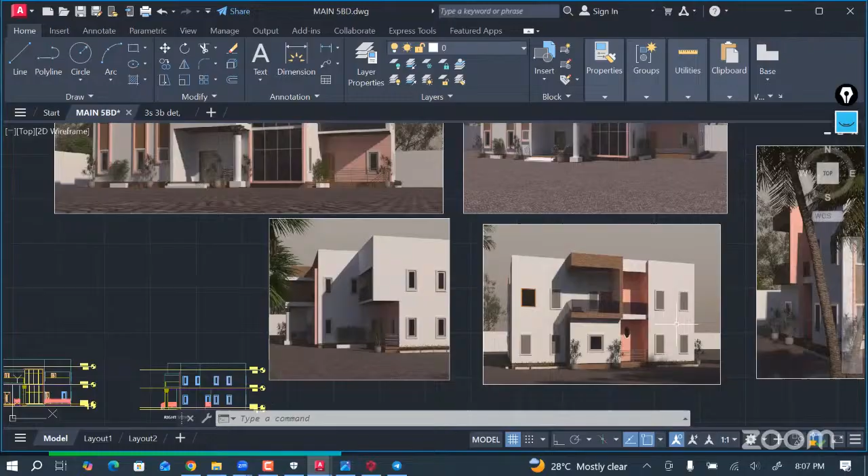So what you are looking at here is a 5-bedroom duplex. This is a design that was prepared specifically for this particular training. This is the 3D model of the building that you're going to be using for this illustration. You can see the 3D model over here, and this one as well.

Moving on, these are the plan views, and here we have the ground floor plan. These are the spaces and the levels of these rooms. This is another ground floor plan, but you can see this one just has these grid lines, and that is it. And here is our first floor plan - you can see the balcony and all the spaces in the room.

We are going to make this drawing file available for you, so that you can practice and repeat whatever we might have done. This is just an elevation drawing. This is the front view. We have a back view over here. We have a right view of this 5-bedroom duplex, and we have a left view. And then we have 2 section views, section X and section Y.

So whenever you get an architectural drawing, these are the kind of things you are going to be expecting to get. You get plan views, elevation views, section views, and plenty more views and details that are going to be required for this design.

So I don't have all the architectural drawing views and others. Like you can see, we don't have a side view here, and we also don't have a roof plan, and that is that. But that is not important for now, because what we have here is exactly what we are going to be needing for this illustration.

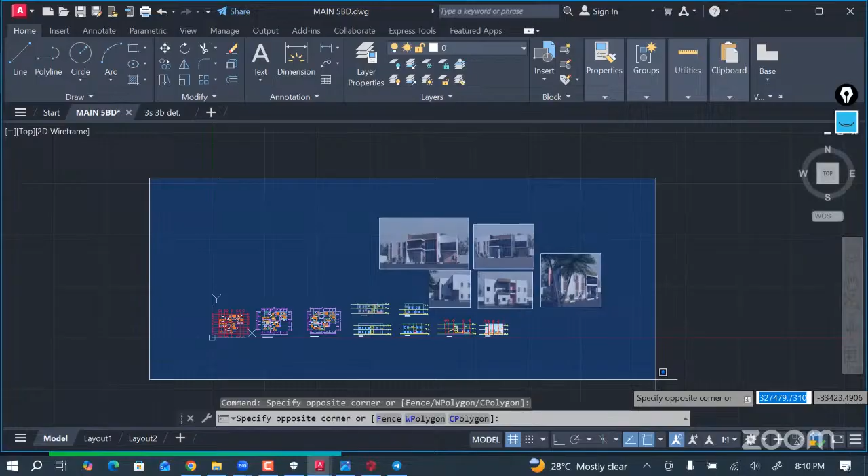So without wasting much of our time, I would like to begin immediately. The first thing I always like to do is copy or duplicate this file, so that when I start working on it, I won't be running into risk of making mistakes or altering the original plan. So just say CO to copy. I'm going to drag this and copy it up here. Let's just copy it here.

So this is what we have here. By the way, we are not going to be going all the way slow, trying to explain everything we do here in AutoCAD, because I assume that most of us are already familiar with the use of AutoCAD or the basic AutoCAD tools. So we are not going to be explaining much of how to use this software. I'm just going to be going directly and explaining what we are doing or what we need to do.

So whenever we have our drawings like this, I might want to hold on, let me shift this 3D view a bit. So let's just keep it somewhere here. Okay, so let's zoom into this. So this is a ground floor view, a ground floor plan, and this is also a ground floor plan.

So what I always advise people or students whenever they are about to begin a structural design is to first of all study the architectural design and try to understand what is really going on with that plan, the concept, what is inside the mind of the architect when he was drawing that, and what they are trying to bring out. Understanding the architectural drawing is going to go a very long way to ensuring that you produce a very wonderful design at last.

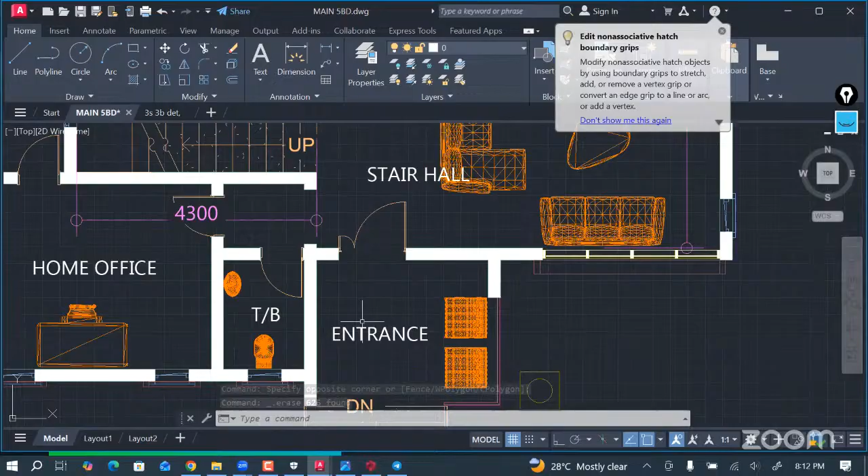So if you look at this now, you're going to notice this is the entrance. Let's study the plan. The entrance, and then you're going to see a very large open space entering the building. We have the living room area, and the stair hall is actually meant to be at this place. So we have a very large living room area, and then a passageway. Then we have this dining area and this kitchen area over here. And then by the left we have a kind of a home office and then a visitor's toilet and bath. So the dimensions are all attached as well. Then a veranda opens to an exit there.

So we have this patio, we have 2 bedrooms at the ground floor. We have a laundry as well. Then at the first floor, following the staircase up, we are going to find a study room closer to the edge of the building, and then a balcony, family living room, pantry, balcony, bedroom, 3 additional bedrooms. One of them is a master bedroom, and then a balcony and all that.

So we now understand this. We can say from what you've understood, this is an open space - the dining is open, the kitchen is open to the living room and all that. So whatever we are doing, we must make sure that we don't create elements or columns that are going to cause obstruction to the passageways.

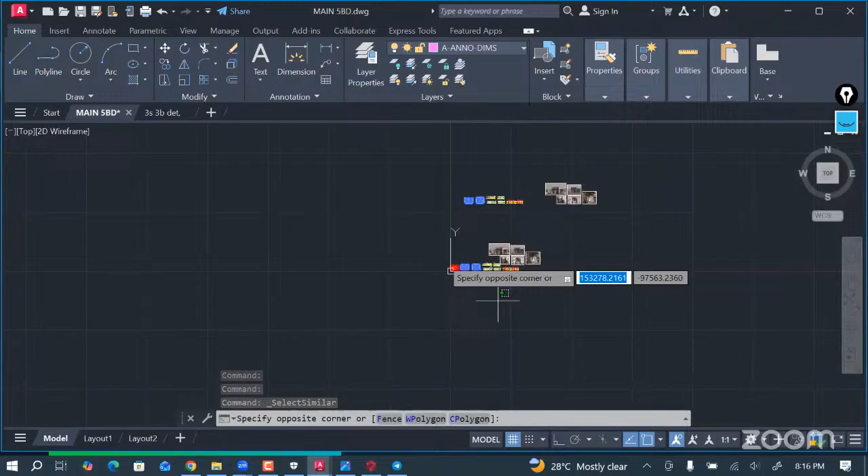We can see this plan now already has dimensions attached to it. I am not going to be using these dimensions, so I'll just delete them. Select them, or let's go select similar so you can select all of them, and let's hold shift so you can select this one and leave only this one, then delete. So our dimensions are gone.

I also want to delete these hatches over here. For that, just select one of those hatches, select similar, then hold down on our shift key and deselect these, and go delete. Once we have done that, this is what we're going to get. This architectural design wasn't done with AutoCAD - if you notice that, this was actually done using a 3D software like Revit and all that.

Moving on now, we can begin adding our axis and then our columns. The first thing you are going to do is add axis at random positions anywhere that we feel is going to be more suitable. Later you will still have the option to edit that - that's why this is an arrangement. You are still going to rearrange all of them and position our axis at the positions where they will be most suitable.

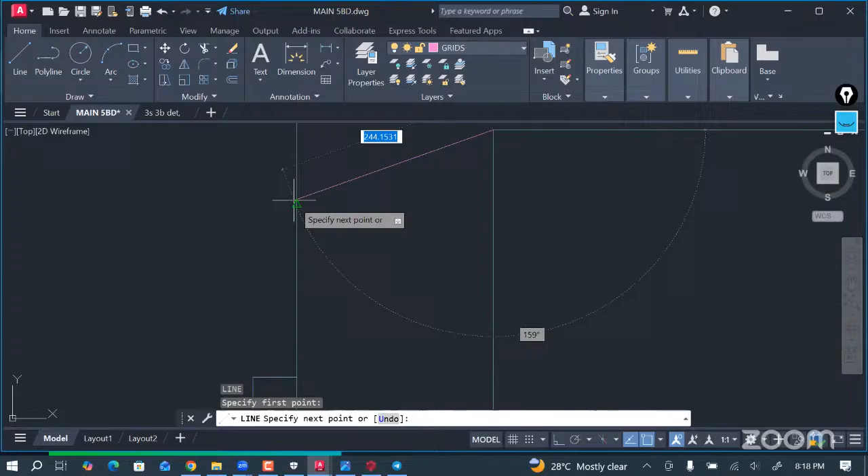Opening this up, I want to make our grid layers active, because that is what we are going to be using for our axis. I'll just draw a line. I want to place this axis as the center line of this wall over here. For that, I just select this and draw a line from this point to this point. Hold on a minute - okay, so nearest. Let's draw this line.

So let's delete this and draw it again. Okay, so we have the line here.

So now we can start adding our axis. To add your axis, simply click on use construction line, say XL, enter, and then V, enter for our vertical axis. Then locate the midpoint of this line, and that is going to be the center line. Once you've done that, delete this line, making sure you delete every unwanted line so you don't run into errors while modeling.

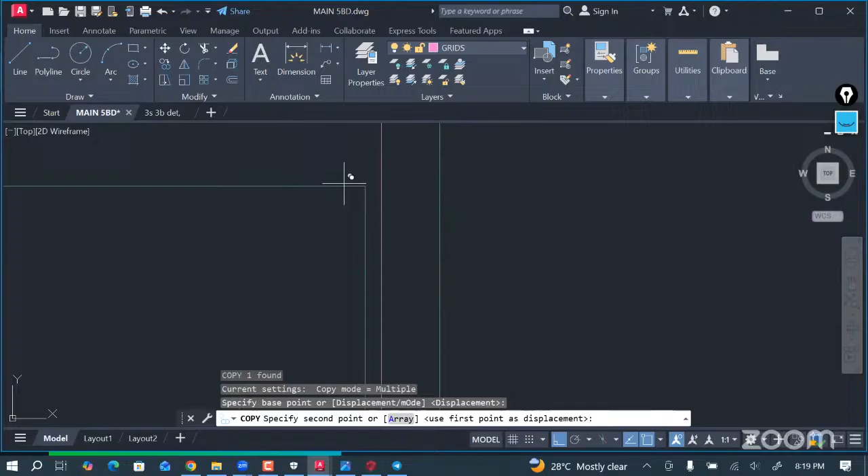So we can now copy this line and start placing it at points where we feel is going to be suitable. Later we'll still get the option to edit this. What I just used is a simple vertical construction line for now, so we can start creating our vertical axis at any suitable positions, and later we'll still be changing that.

Okay, so we've had one here, so let's add one here, and we can add one here too. Let's locate our walls. I think we're done with the vertical lines, but maybe let's add one here as well. Okay, that is fine.

Now we can start adding our horizontal axis. First, let's draw a line just like this all the way down, then XL for construction line, enter, then say H for horizontal construction line. Once we've placed one, escape, then delete this one immediately.

Now let's select this, CO to copy, and start placing at wall center lines. You can place one here, one here, and let's place one here. So where else do we need one?

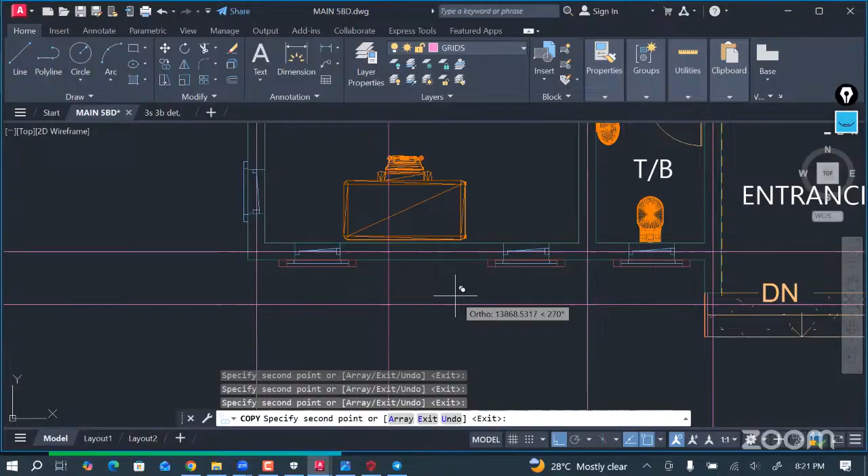Okay, so we've done that. Let's place an additional one here, and let's also place another one here. We've now succeeded in placing at all the necessary points, so we can place one here, and we can take one of these vertical construction lines and place one here too. That is fine, that is fine. We've now succeeded in placing our construction lines at the regions where we feel they are going to be most needed.

So the next thing we can do is trim off all these excess construction lines that are running to infinity. For that, I'll just use a simple rectangle tool, select this, draw a rectangle just like this, and go over here.

Okay, seems like we have a column here, as you can see in our 3D view. Let's check this 3D view. So we have a column here, and this column is under this balcony - it's the column that's actually carrying the balcony above.

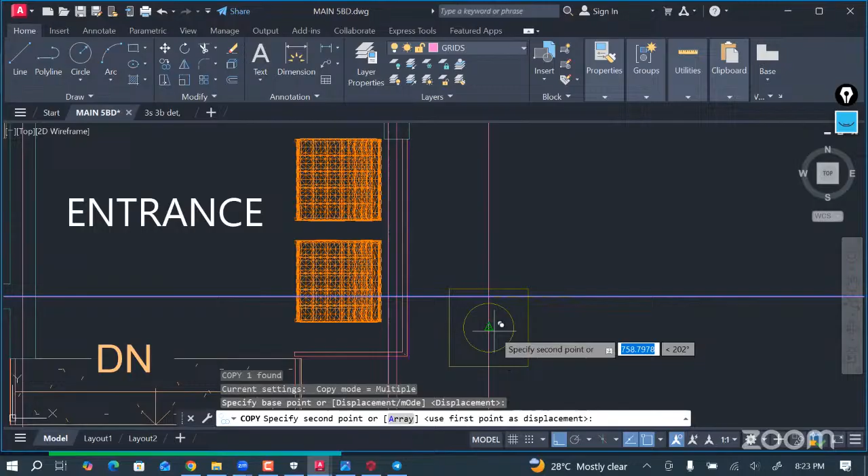So for that, we also need a construction line for that as well. So XLB, enter, and let's place at the midpoint of this circle, and then let's get this one as well, adding the midpoint of the circle. Okay, so we've done this now.

So let's trim off the excess construction lines. Select this, go TR, enter, and then select this, trim this off, trim this off, trim this off. Oh, I think we made an error there. Let's trim this off, trim this off. Okay, press escape, and then we can simply delete this.

Once we've done that, we're going to get something that looks like this, which is working out fine for the time being. So we can continue - I think we need a horizontal construction line at the edge of this wall here. Let's just take this one and move it over there. Okay, we've successfully done that now.

So moving on, we're now going to start adding our columns at different strategic positions. To do that, we're first going to begin with a basic column size, starting with an initial sizing of the column.

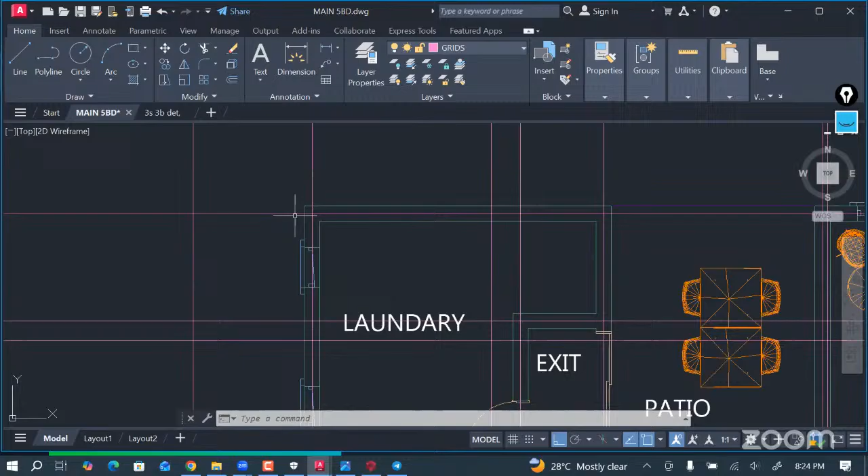Knowing that this is a duplex, a one-story building, the size of our columns that we're going to start with is going to be around 225 by 225 millimeters, knowing that the width of this wall is only about 225 millimeters.

So let's go to annotate and try to set our dimensions, so that we can see it very clearly. Let's go to modify, and let's go 300 millimeters. Let's set the text to 300.

Let's go to primary units and change the precision to 0, then say okay, set current, and close.

The width of this wall is 225 millimeters, as you can see here. So we can start by using a column of 225 by 225 millimeters.

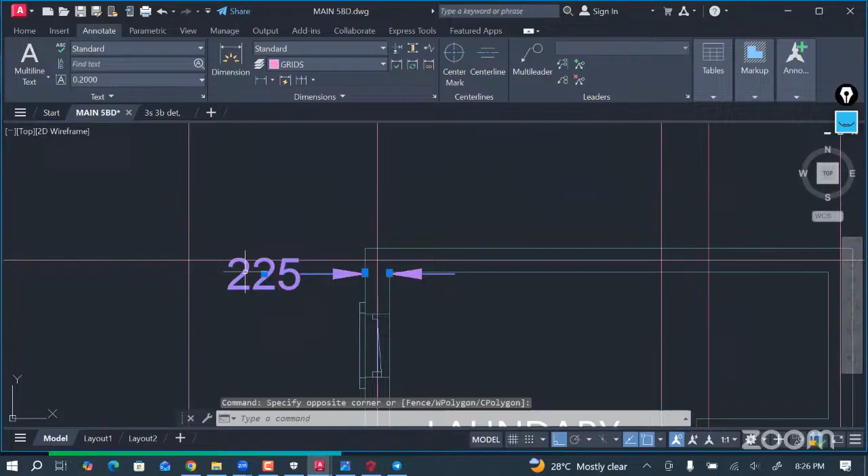For that, now we are going to go to Home and change our layer properties to that of columns, and then let's say LW so that we can make our line width display active. Let's set this up, this should be by layer. Okay, now click REC, enter.

We're going to create a rectangle. We are not going to be using lines to form this rectangle, because ProtaStructure only recognizes polyline elements for our columns.

So now we are going to say D, enter the dimensions 225, 225, enter 225, enter, then click at the other point. The reason why we are starting with this is because that is the smallest we can have.

The initial sizing of your column actually depends on the kind of structure that you are designing for, the massiveness of the structure. If we are designing for a 4-story building, 5-story building, or if you are designing for an 8-story building, your normal engineering mind should tell you that a 225 by 225 millimeter column is not going to be suitable to carry that building.

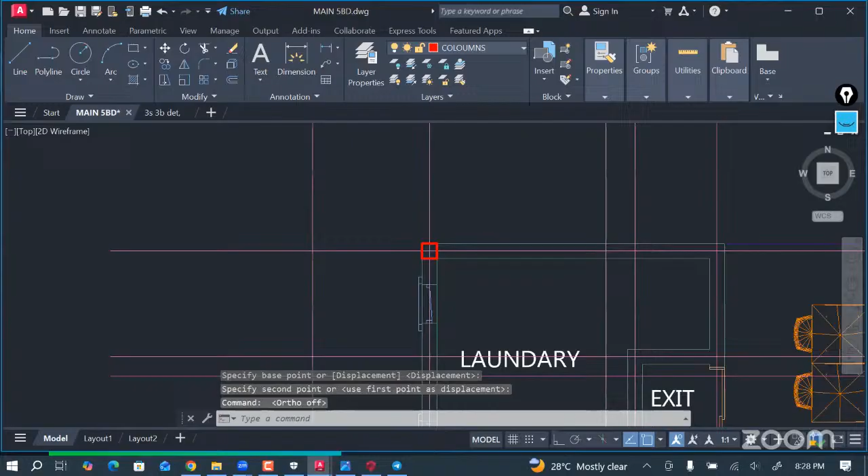So I'll just move this. I'm going to get the geometric center and then move it to this point. Yeah, so this is what we have now. I've now successfully created this first column.

We can now simply copy this and start placing it at strategic points where we feel columns are going to be necessary. This is an arrangement drawing, which means we still get the option to start editing and rearranging them and placing them where necessary. This is just to get the initial setting of how it's going to look like.

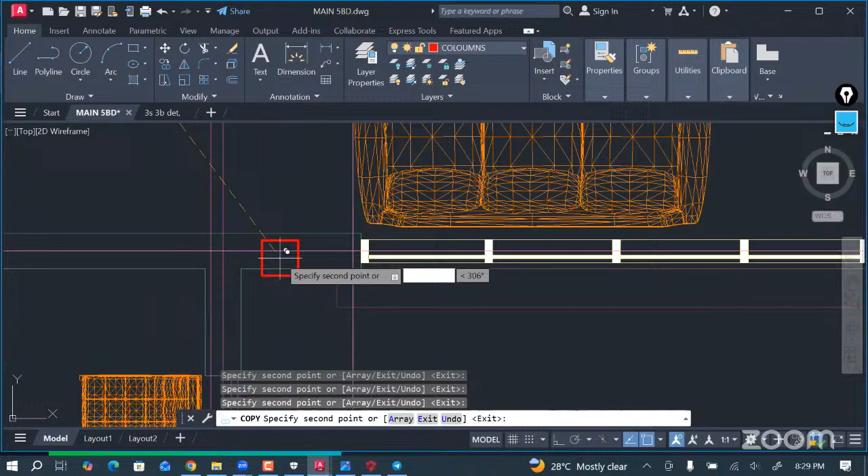So we can simply click and place columns at any point we want. We can have one here, and one here, let's add one here, let's add one here, and let's add one here. I'm going to try to be faster. Let's add one here, and let's add one here. We can add one here as well, and let's add one here, let's add one here. Okay, so that is good.

So we can add one here, can also add another one here, and we can add one here, and then we can also add one here. So this is fine. We can add one here, and I think this is good for now. Let's add one more here. We are still going to be editing all this when the time comes. We can also add one here, and let's leave it like this for now.

But then again we still need to add this circular column. This rectangular line is just representing the base of the column, of this circular column. So for that, now we are going to use the circle tool. Just click C for circle, get the center point, and then click at this. So this is going to be the column for this as well.

Having done that, the next thing we are going to do is start shifting our columns and making sure that our column distances between them are very, very accurate.

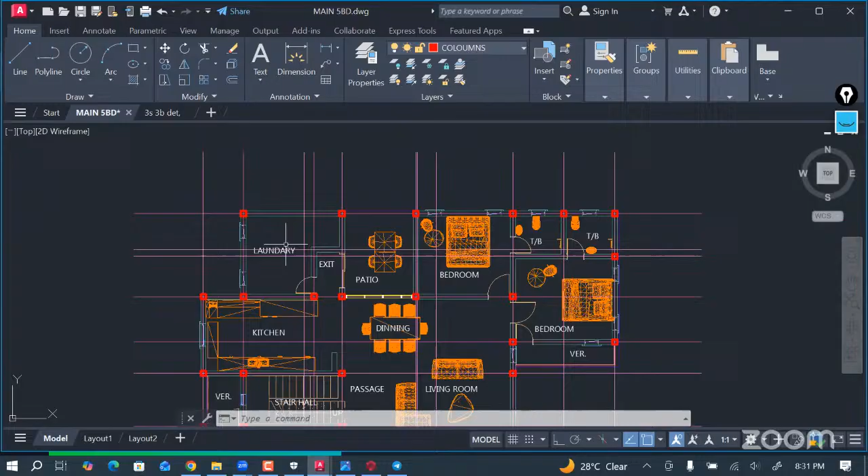Okay, so we need to maintain a maximum distance between columns of 6 meters. Knowing that this is actually a small structure, so we need to maintain this. If I'm designing for an 8-story building, because it depends on the kind of structure, I will need to maintain a minimum distance between columns of about 6 meters, knowing that that kind of building is going to be sitting on a foundation like a pile foundation.

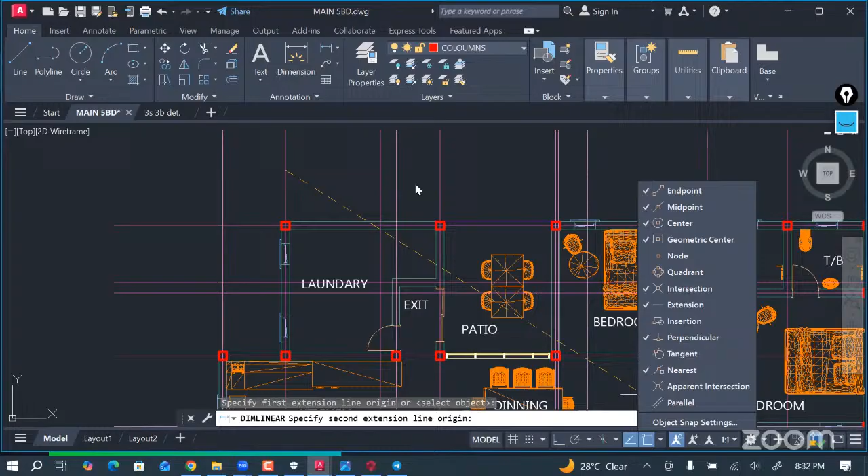So for that now we are going to take a measurement of this distance here. Let's take from this axis to this axis. So the distance between these columns... okay, that's not the distance. So let's go from here.

Let's change these properties for our grids, for our dimensions rather. So let us choose any one of these. I can use the dot dimensions for our grids. So let's go from here to here now, and the distance between that is 4,300 millimeters. So it's actually less than 5 meters, which is very good.

So we can continue to this place now. The distance between these columns is 3,225 millimeters, which is nice.

So we can just simply delete it. We can continue adding our dimensions. So let's go from here to here now, and we have 2,225 millimeters, and here we have the same thing.

So the lesser the number of columns that we are getting, the more economical our building is going to be. So for that now, I just need to check the entire span or the total distance of these two spans, knowing that these spans of 2,225 millimeters are actually very small. So the distance is 4,450 millimeters.

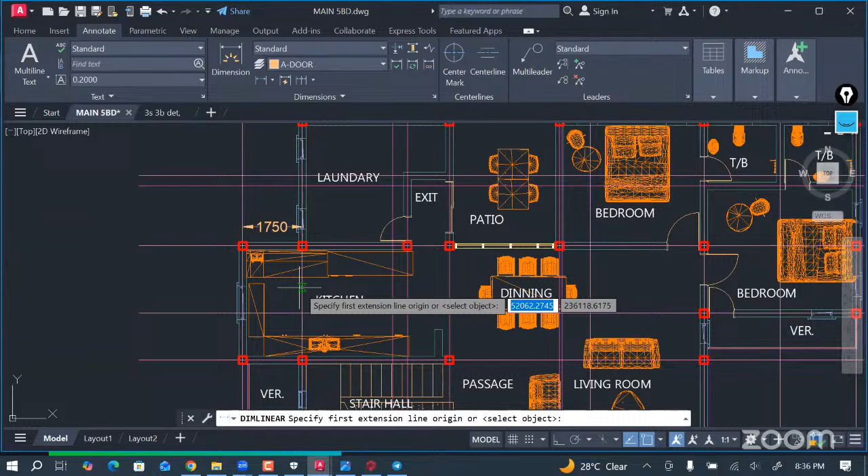So moving on now, we have added these columns and we have also added this one. So we can check the distance between these two columns here. This is 1,750 millimeters, and the distance from this one to this one here is 3,075. So let me check the distance from this column to the one at the extreme.

Okay, so for that now I will need to delete this column down. Let's delete this column. So the distance between this column and this one is going to be 4,300, and the other one is going to be 1,750. That's very fine, so we can leave this just like so.

Okay, so we are also going to leave this. This looks very suitable, so we can leave this one here now. Let's start going from this side and check the distance between these columns. From this one to this one, 4,300, and let's add one here.

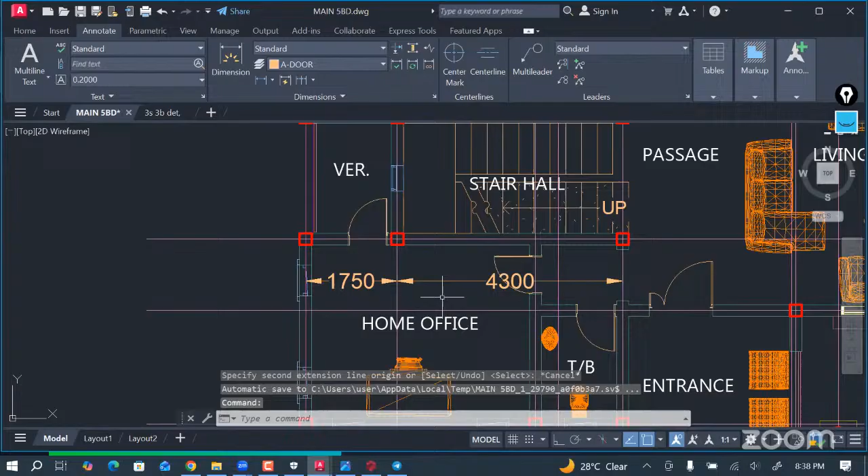Let's do that again. So the distance here is 1,750 by 4,300. Okay, so this is actually very accurate. It's the same with the one above here. Okay, so that's very fine.

We have just finished placing our columns. So this column can be here and this one can be here. We just need to leave this column at this axis intersection, and that is that for now.

So the next thing now, you need to do some adjustments here. As you can see now, these two columns are not well spaced apart, the distance between them is just 1,400 millimeters. So let's check the distance from this column to this column, be sure that it didn't exceed 6 meters, and it's only about 3.425 meters. So for that now, I just need to delete this column.

And then let's get rid of these dimension lines. Okay, so this is what we have now. So then this area around this panel, we are going to leave this as so just for now. So when we go into our beam paneling, we can now be able to adjust it, how we are going to leave this living room, or what you are going to do about this. Okay, so that is that now.

So for that now, after placing your columns and your axis, the next thing that you need to do is what we call superimposing. Superimposing is just making sure that the columns that you have placed at the ground floor level are not intersecting spaces at the floor above it. So we are just going to perform what is called superimposing.

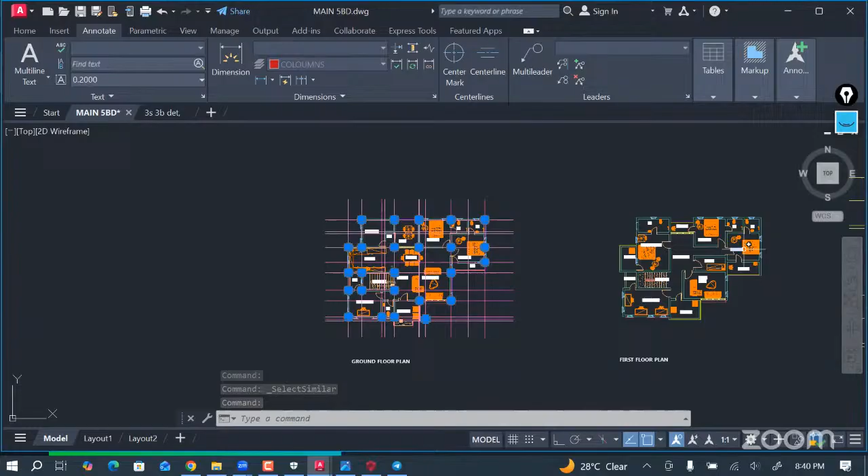We are going to copy this column and then place it at this first floor. When we place it now, we can be able to see where the column is leading, so we are going to choose a base point.

Let's go CO, enter, for copy. Then let's choose the base point. The most stable base point that you can choose is the staircase area, because the staircase area doesn't usually change. But if you choose this base point at this edge, if you go to the first floor, there is every tendency that it's not going to be the same because it's not typical. So I usually prefer to choose a base point from the staircase area, because the staircase area does not change. So let's copy this and then place it at this position right here.

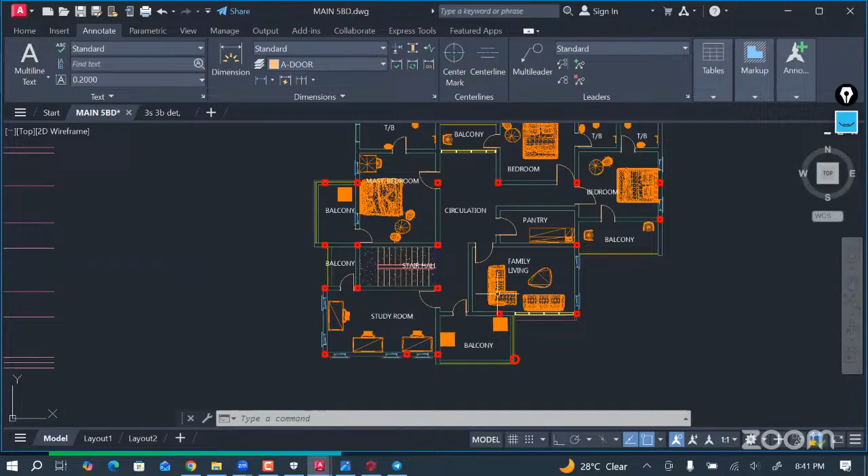Okay, go escape, and then this is what we have. So let us just simply watch this design and look at the places and their placement, and be sure and know which of them is intersecting with any space. Luckily we don't have anyone intersecting with any spaces or any element, except for this one. This is actually intersecting through this door.

Okay, so this is going to be causing forcing this door to either shift to the left or right, and this door is actually leading directly to the master bedroom. Looking at this design now, you're going to notice something. This door was actually pre-designed to be at this particular position because a space is meant to be here around this place. So we cannot shift this door up, or we cannot shift it down. So for that now we need to know what we are going to do about it.

Okay, so we are going to treat it right now. So if we shift this column, let's go CO. If we shift this column from here and bring it somewhere around this place, let's take this base point. Okay, so let's delete this. Okay, so where is this now going to be positioned in this ground floor?

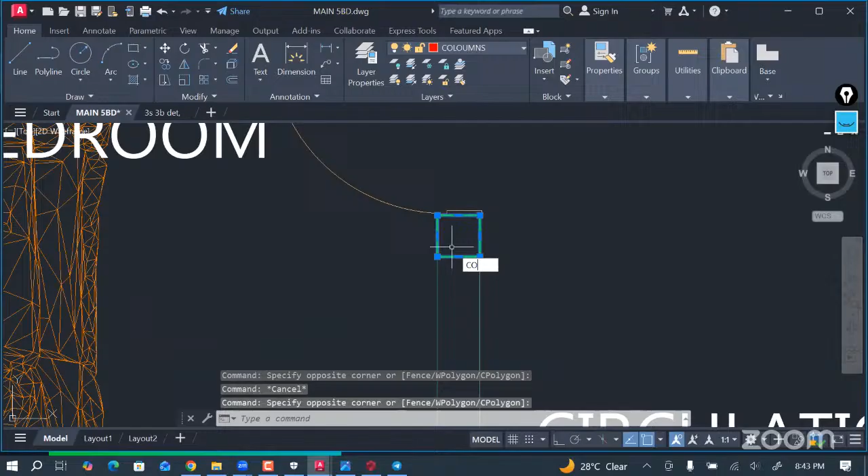Okay, that is what we are all about. Okay, so let's select this. Let's change the color of this particular column. Let's go properties, and then let's change the color, and let me use this green color, lemon color. Okay, so let's select it, go CO, and then let's go from our base point to superimpose it on our ground floor.

Okay, so let's see where it is now. Okay, so this column now is intersecting our kitchen and the space between the kitchen and the dining area, which is not very suitable. Okay, so this position where this red one is the most suitable position for this column at the ground floor.

So for that now, what we can do is to push this column upwards. Okay, so if this column starts from the ground floor, we can just terminate this column. Okay, so that is the best thing we can do. We can terminate this column at the ground floor, after the ground floor, and then start up another column at a different location, maybe around this location right here.

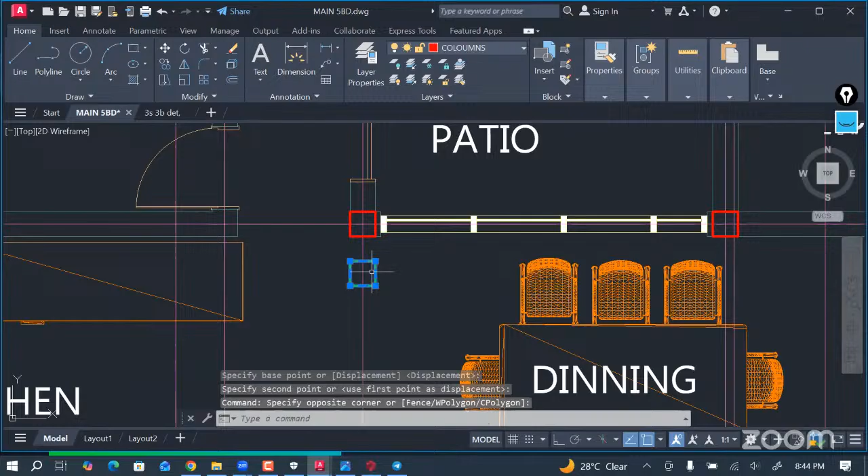Okay, so for that now, let me move this column, enter. Let's move this column from this place now to this place. Okay, so now we can simply delete this column. Okay, so since we are terminating this column at the ground floor, this column is going to start from foundation and go through the ground floor, and then we terminate this column here, and then this column now is going to start or begin from that first floor and then go all the way to the roof.

Okay, so for that now we need to indicate that, so that we don't make a modeling mistake when we now start in Protastructure. Okay, so just simply select this column, and then let's change the color of this column. So I can use this color. Okay, let me use magenta, this magenta color. Okay, so whenever we see this plan now, we can be able to say that this column is terminating. Okay, so any column that we label with this color, we can know that this column is actually terminating at this position.

Okay, for this now we can simply change the color of this column, indicating that this column is starting from the first floor to the roof. Okay, so you can leave it as green, or let me change it to cyan, this cyan color. Okay, so this is nice for now. This is very good. Okay, so for this now we can now continue checking our columns and their positions.

Okay, so knowing that these columns are now going to the roof, and the roof is not as heavy as the first floor, the columns at the ground floor, your column beams and slabs at this position are going to be carrying your columns and beams at the ground floor, will be carrying your beams, will be carrying your slab at the first floor level. So the columns here will be carrying this first floor level, and the columns at this first floor level will be carrying your roof loads. Okay, so that is understood. So the columns here will be carrying this first floor, and the columns here will be carrying the roof.

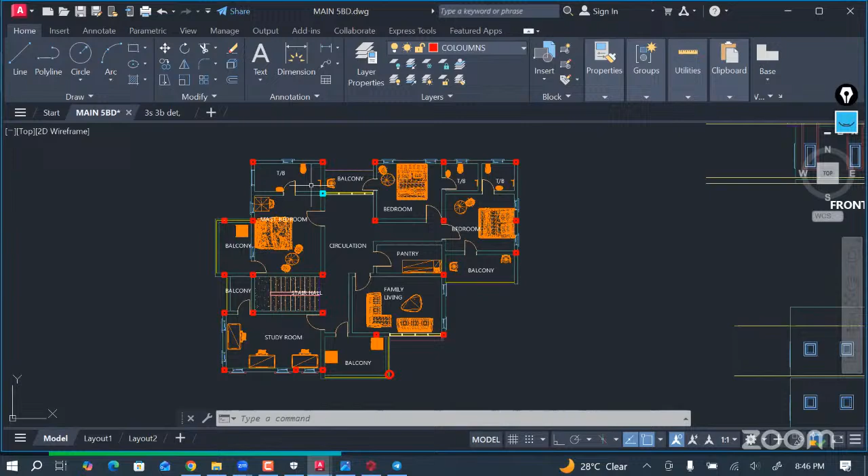So knowing that these columns are going to be carrying the roof, and the roof is not as heavy as the floors, what we can do is to terminate one or two columns. Okay, so we can reduce the number of columns that are coming up here. So that way the structure is going to be more economical.

Okay, so for that now we will simply need to terminate this one here. Before we do that, let us check the distance between these columns. Let's go from the center point of this to the center point of this. Okay, so this is about 6.05 meters.

6,050 millimeters. Since this is carrying the roof, I might want to go all the way, and it's only about 6 meters. So we can simply remove this column at the first floor level, which means we are terminating this column after this ground floor.

Let's select this down, then go to properties, and change this to this magenta color. I think our grid lines are interfering with this magenta color.

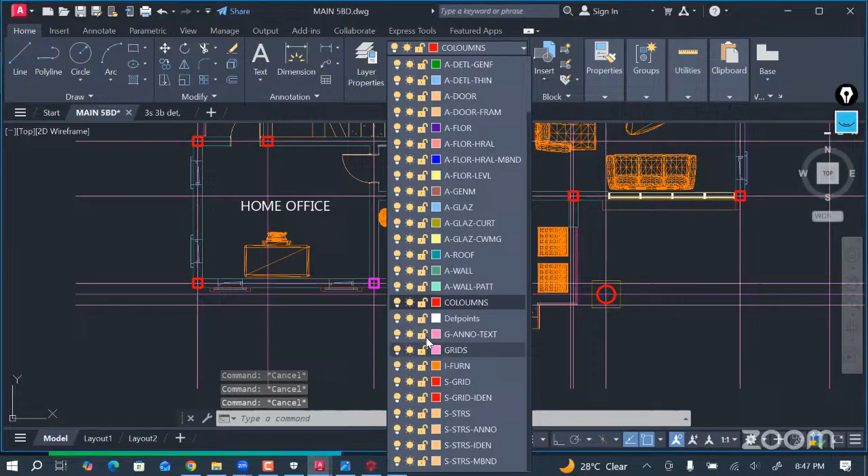So let's change the color for our grids, let's go something lighter. Let's find the yellow color. Okay, yeah, I think this is more comfortable to look at, just like so.

So you can see now that we have two columns that we are going to be terminating here. We have this column here, and then we have this column here. We are going to be terminating both of them.

Okay, having done this, next we need to start adding our beams, performing what we call paneling on our design, our plan. So we are going to be arranging our beams in our plans.

For that now I will need to delete most of these furniture elements over here, because they are not going to be very useful. So to do that now, we first lock our columns and grids, so that we don't mistakenly delete or select them. Let's delete all these label elements, text labels, let's delete this.

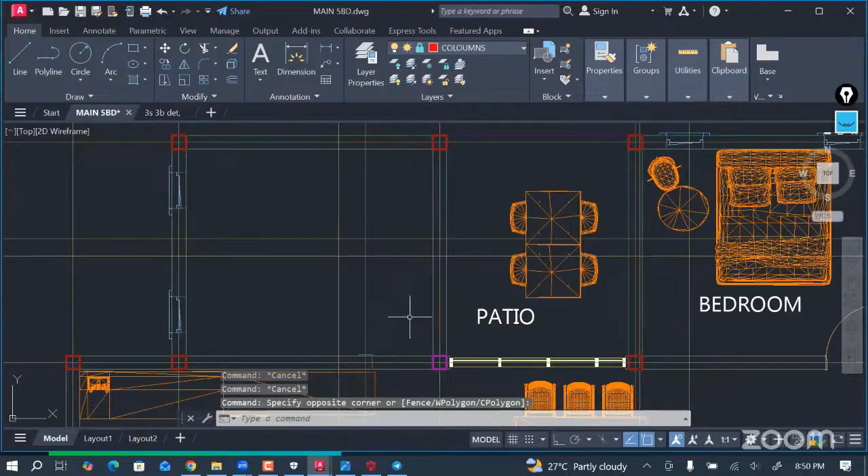So there are some basic rules that you must keep in mind while performing your paneling. Number one, your panel area must not exceed 30,000,000 millimeters squared, that is length times width of your panel. It must not exceed 30 meters squared, that is 30,000,000 millimeters squared.

So for that now we need to check the size of this panel area. This is 4,300 millimeters, and let us also check the distance from here to here, so this is 3,725. Let us open our calculator too, and go 4,300 millimeters multiplied by 3,725. Okay, it is 16 meters squared, which is less than 30 meters squared.

So this simply means that this panel is okay to be just like this. Assuming this was higher than 30 meters squared, what I can simply do is run a beam at the middle, just create a beam, draw it here, add another beam from the top to this place here. But since this is less than 30 meters squared, this is suitable.

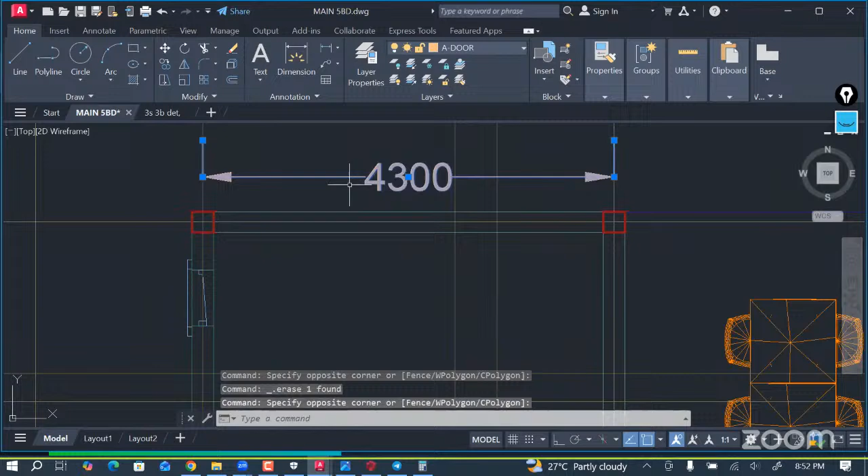So for that now let us delete this as well, and then let's go to our annotate tab, and label this as our first panel. Let's select a multi-line text, and go P1, capital letter P1, which simply means panel 1. Let's select this and change the size of it, so I can go 450.

Say okay, so I can change the color of the text, I can use any color, let me use this one for now. So this is our panel 1, this is panel 1. So let's select this now, enter to move it, and then let's move it to the middle. So this is our first panel over here.

Okay, so this is an empty space right here, but above it now there is a balcony, over here, so this balcony is also going to be modeled. Let's go CO to copy rather, let's copy from our base points and then place here, let's see where it is at.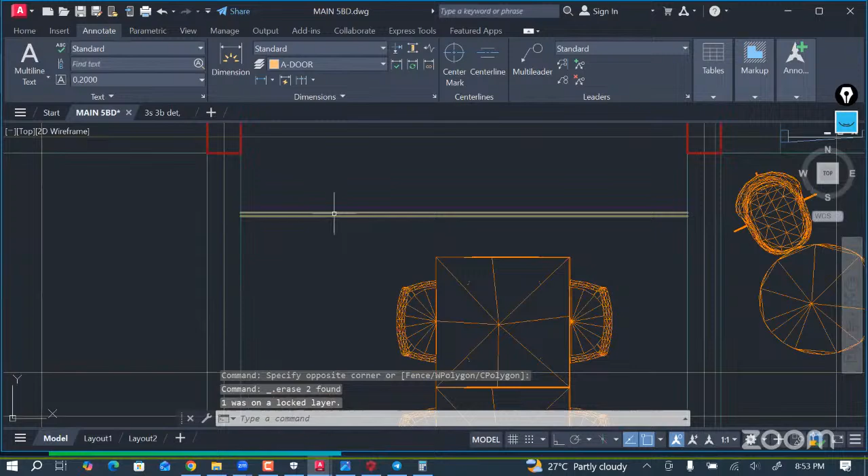Okay, so this is where the slab edge stopped. Here are the railings, and here is where we have the slab edge. Now I am going to delete these furniture elements, delete this, and delete this text symbol.

Let's select this CO and move this one over here and call this panel 2. Always feel free to type something on the chat box if you're not understanding anything - I can save your questions. We are going to have some minutes for questions.

So this region here, this panel from here now to this place is going to be our second panel too. For that I will just need to select this and then MA to match properties, and change the slab edge line so that it can look like this. So this is panel 2.

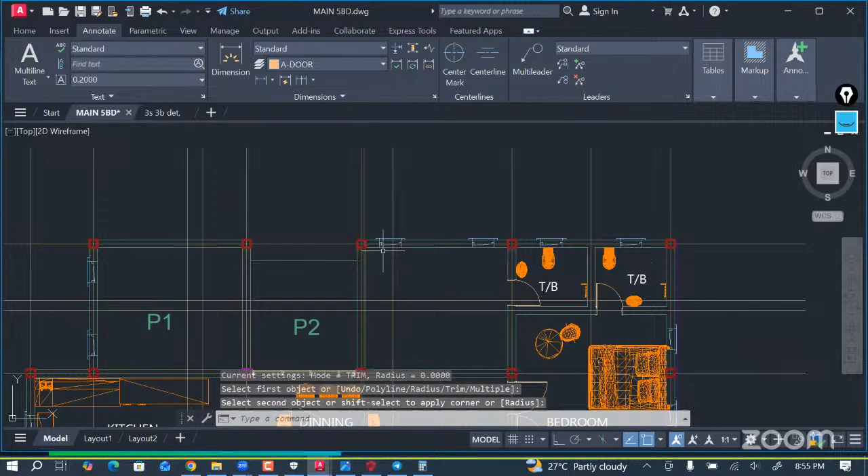For the following panel you can delete this, and let us also delete the doors, and check this just like this. So this is going to be our panel 3. Let's extend this.

Let's copy this immediately. So this is panel 3. Now we are going to delete these ones as well.

The bath, the wash basins, and the shower, the doors, and the toilet seats. So we can extend this over here.

So for this now, let's copy this and place it here. So this is going to be one panel and this is going to be one panel. Let's change this to P4, which is panel 4. Let's change this to panel 5. So this beam is going to be going from this column to this column now.

This beam will go from this column to this column. So this beam now, we have to go from this panel, which is going to be bounded by a beam that will be resting on this particular beam. So this beam here is going to go from this beam to this beam, and then this beam is going to be dividing them, going from this beam to this beam. Okay, so that is that.

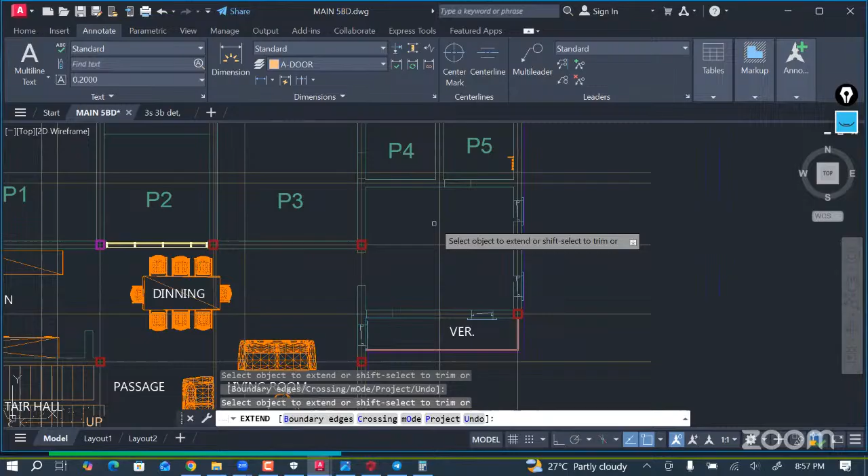Let's extend this as well. Let's extend this. Let's copy one of these. So this one is panel 5, so this one should be panel 6.

So you can see how we are going on with this gradually. Coming here now, we can choose to collapse this wall. This is not a structural wall, it's not a load bearing wall, so you can simply collapse it.

Let's go from this place. Let's delete all the furniture elements on this kitchen, and let us extend on this one.

So this is going to be our 7th panel. Let's go CO. So this is the 7th panel now.

So always bear in mind how you do your paneling. I believe we are all following, and please, if you have any question, please save your question - we are going to have time for that. So how you do your paneling solely depends on you as a structural designer. Whatever you do solely depends on you. You can choose to panel it in a different way.

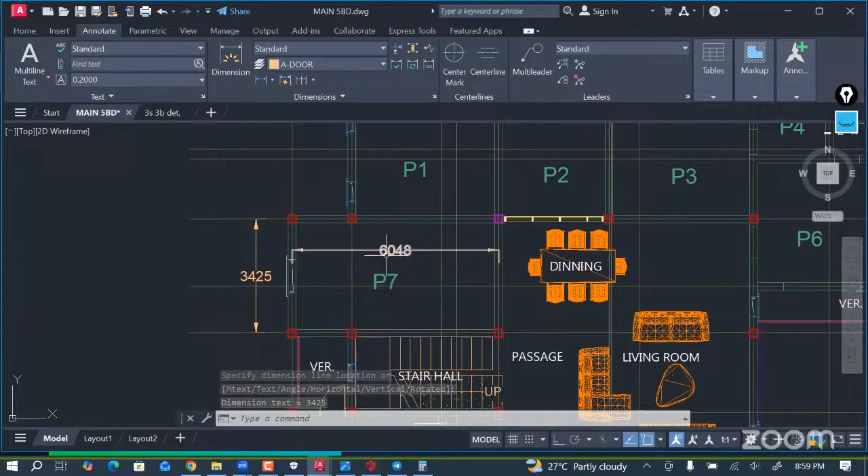Okay, so if it is more than 30 meters squared, we now have to change. This is 6,000, about 6,000 millimeters by 3,000 millimeters. I think this is good for now. So let us delete this.

And then for the dining area now, we are going to notice something very disturbing, that this panel is becoming already too large, and our beams are going to be going up too long. So there is a thumb rule you need to keep in mind whenever you are doing your general arrangements: none of the beams should be longer than 6 meters. This beam, none of them is longer than 6 meters for now. So that should be the maximum length of beams used in this kind of structure.

This is already measuring 7,004 by 7,200 millimeters, and that is way too much. If you do the math, it's going to give around 49 meters squared. Well, this is 7 and this is 7, so it is already more than 30 meters squared.

So what you can simply do is run a beam across this place to break up the panel. But if we do that, the length of our beam is going to exceed 6 meters, because this is already 7 point something meters. So if we run a beam here, it's going to be too long, and it's going to fail due to deflection.

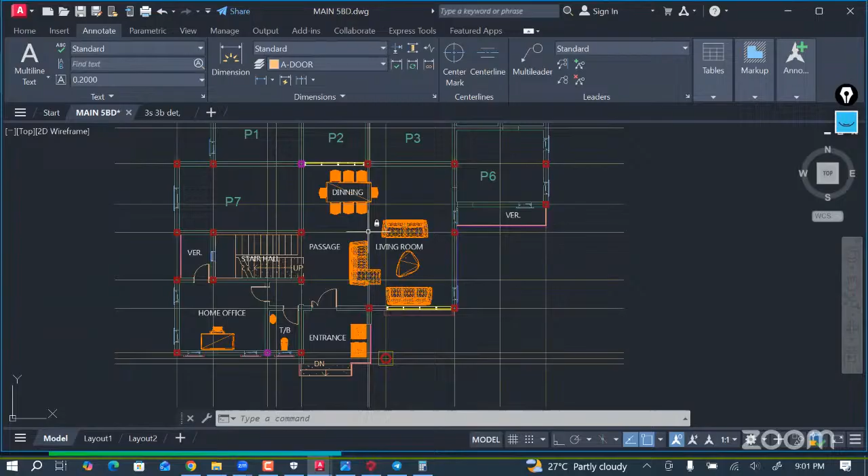So what we can do is add a column at a point to be able to break up the beam and also break the slab at the same time. To do that, we are just going to select one of the columns.

So let's turn one of them on. Let's select this column, copy it from here, then position it. Where should we position it? We can choose to put this here. This is very nice - we will still have some space left between this column and the other, about 800 millimeters, which is actually fine for someone to pass through. So this is not actually that bad to have this column around this place.

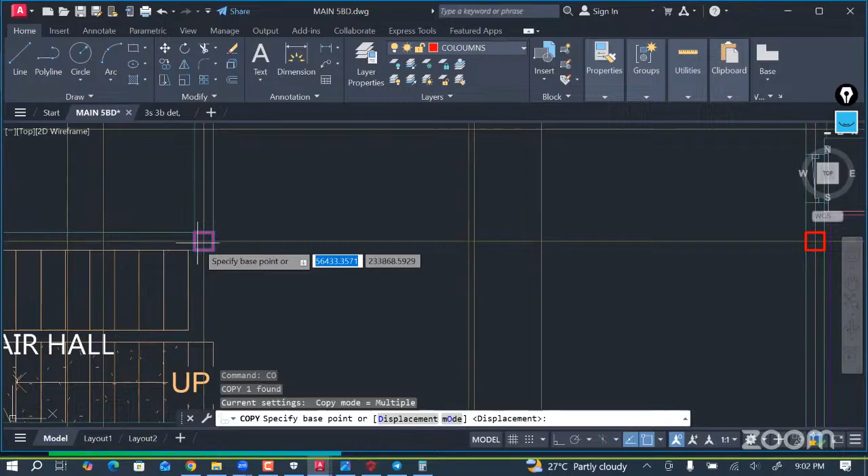Having done that, you can now start paneling that. So let us delete all these furniture elements here. Okay, I think we mistakenly deleted our column. Let's go CO, let's lock this... okay, so we have locked our column back to how it was.

So let us now simply extend these beams here. Let's select this, go EX, extend. Okay, we have now extended this. Let's extend this as well, EX, extend. So let's extend this one all the way down. Okay, so this is what we have.

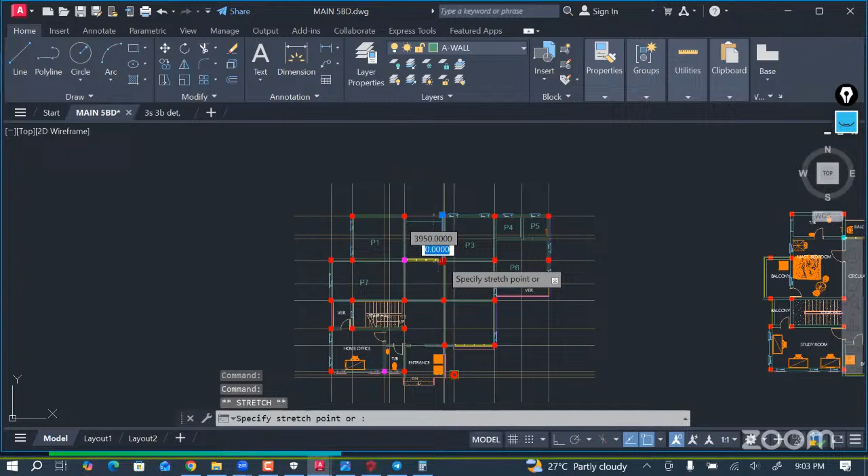It looks like this is not straight, so let's go Ctrl Z, let's undo that. Okay, so let's extend that manually. Let's continue extending, let's extend this all the way down.

So for this column now, we can see we have two axes here that are very, very close to each other. So I would like to move this here. Let's go CO, or M. Okay, let's turn this on. Let us move this from here to this place now. So let us also turn our grids on.

So I want to delete this grid and we can finally get rid of this. This is actually not a structural wall - it didn't go all the way, it actually stopped at the balcony region. You can see from our 3D view that wall didn't go all the way up. Then let's see whether you can see it from here - okay, we can see it very clearly, because it's in white color. So this wall here actually stopped somewhere around under this balcony. So we are going to leave this just like so.

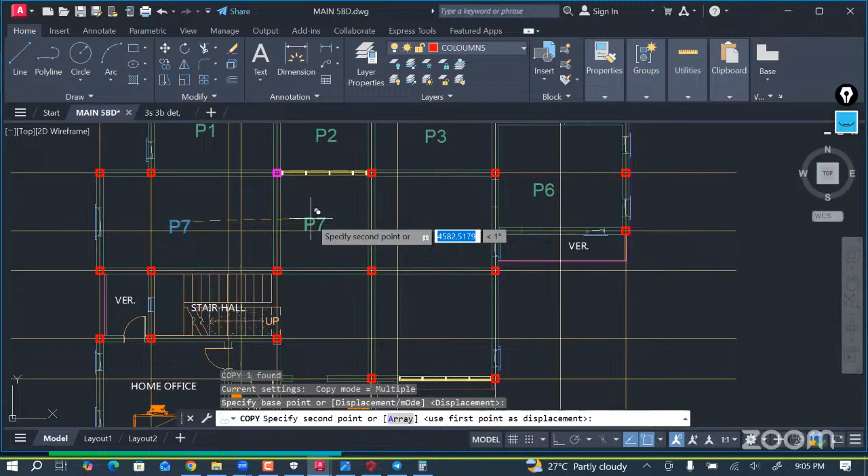So let us now label this. CO, enter. Keep one here, one here, one here, and then one here. Let's change this - this is panel 7 and this one will be panel 8. This will be panel 9. Let's move this to the middle. Panel 9, and this will be 10.

This will be 11. At this region here, we have a veranda at the ground floor level, so we can see from this veranda what we are looking at here. And then we have a balcony above around this region here, so we are going to get the dimensions of that balcony from this place.

You can see now this balcony is actually lengthier than the other one below it. So for that now I just need to copy this, go CO, enter, and take the reference from this column, and then let's place here. So with this now we can simply delete this, since this is not going to be useful.

So this is going to function as our slab edge line, this line here. Let's just select this and delete this, and then we can have only this as our slab edge line. We are going to model it as a slab edge line. We are not going to be adding a beam around this place, because looking at what we have in our architectural drawing, there's nothing like a beam around this place.

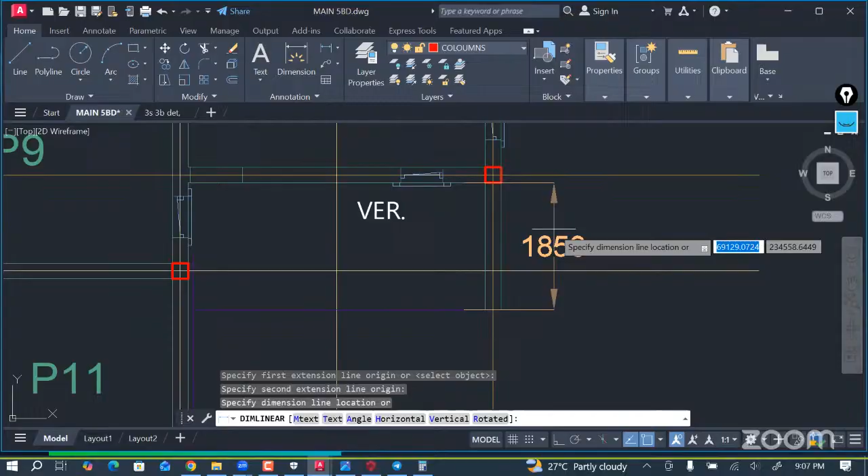So then we have a wall that started from this place, and that is exactly what you are going to be doing. Although this is going to be a very lengthy cantilever, about 1,850 millimeters length of a cantilever beam, that is going to be of a cantilever slab. It's actually very possible to be modeled and designed.

So for this now I'm just going to take this CO, enter, and then this is going to be our 12th panel. Let's go P12. So let's delete this panel 12, and then for this stair hall, let's delete this label.

So this, we are going to be creating a void around this staircase region. That is going to be telling us that this is actually a void. Let's draw a line just like so, a diagonal line, and then let's draw another one from this place now to this place. So we can take the property of this and let us match properties with this one.

So this is very good, so this is going to be the void. We can actually label that if you want, so let me just use this to label it. Let's go void, so we don't forget, and let us copy this, or move rather. So this is going to be our void space.

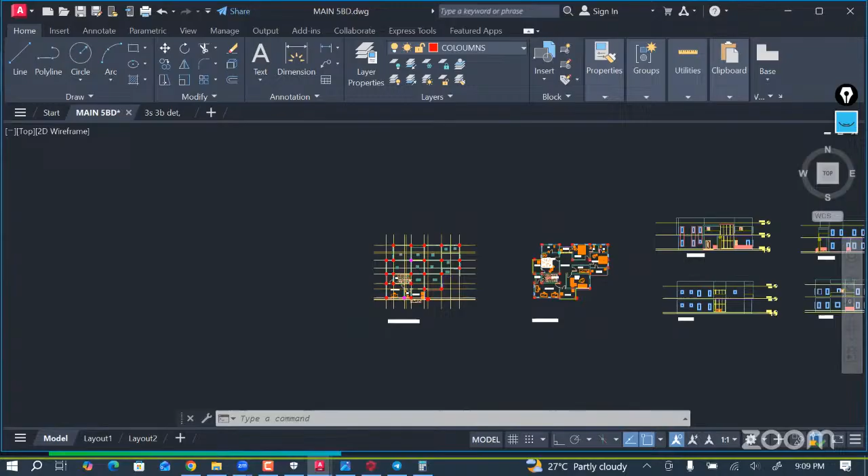Additionally we have a kind of a cantilever slab around this place. Looking at this design now, you're going to notice that this slab, this balcony actually extended past this slab, this column points. So for that now we are just going to simply copy this so that we can be able to note the exact points. So let's copy from this place now to this place, and that is going to be the edge, the slab edge.

So for that now let's go F for fillet. Let's fillet this one. So this is exactly how this is going to be looking. So we're going to be having a cantilever here. This is going to be another panel, and the last panel we did was 12.

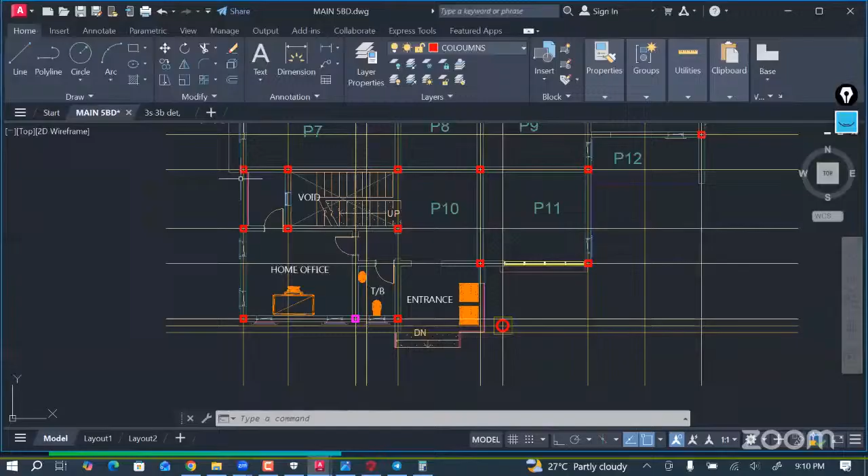So let's go CO, and then let's copy this. This is going to be panel 13. Let's just leave it outside there. So this is actually very good. So a beam is going to cross here, and then a cantilever slab is going to project out to this place now. So this is very good for now, and then let's continue doing our paneling.

So there is a balcony here upstairs. This balcony is actually, okay, so let's check. Let's go and check. So this balcony now, let's select this, go CO. Let me copy from this column as a base point. Let's paste here. So this is very good. You can delete this one here, then we can match properties with this one.

Okay, it appears it's not matching, but you can still use that as a base point. So for this now, let us select this CO, and then let's paste this here. So this is going to be panel 14.

So for this home office, we can delete this home office area. So let us delete the visitors toilet and bedroom, and let us delete this one as well, and let us delete the chair around this region as well. So let's go CO, enter, and then let's keep this one here. So this is going to be our 15th panel.

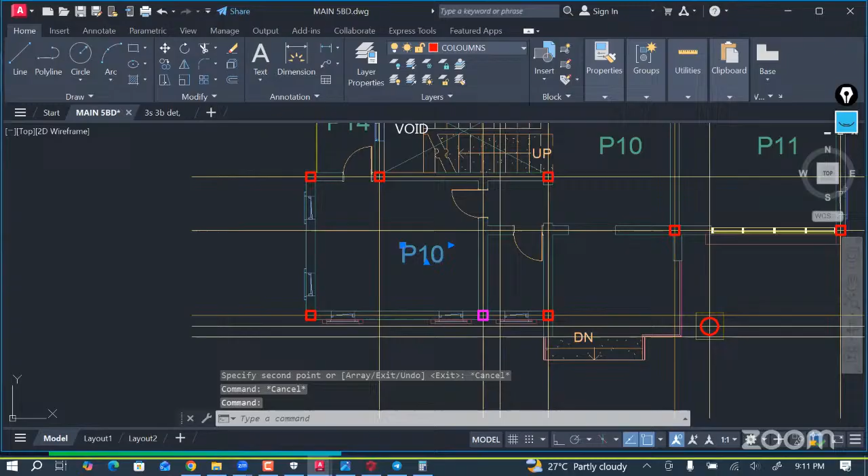Okay, let's extend this. This is very good. I can choose to collapse this wall here. Let's collapse this wall, and join this down with this. Let us extend.

Okay, so this is going to be the 16th panel, CO. Now let's go 16.

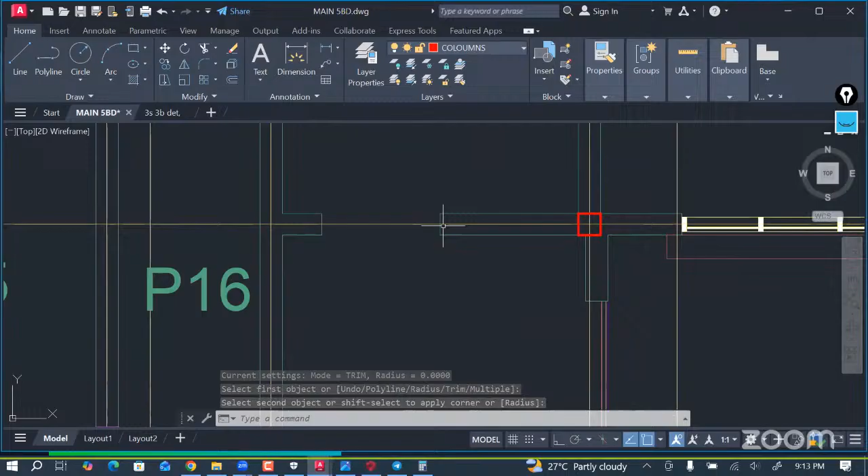This procedure is actually a very simple one. It's the same procedure you'll use even if you're designing a larger building. You simply create your panels the same way, or perform your general arrangement drawing the same way.

So we now have panel 15 and panel 16, and the last one should be our balcony. Let us go here and get this balcony from here.

Let me select this line now and go CO. I can choose to go from the base point of the center of that circle over there. We can place this here now. This is going to be the edge of our balcony.

For that now, I'll choose to delete this. We can delete this and have it just like so. Maybe we can leave this just like so. Let's delete the staircase. This is what we are going to have for now.

Here is going to be our 17th panel. CO, copy this, place this here. This is the area of our 17th panel. Let us look at that drawing very well. It appears there could be a beam holding this panel together.

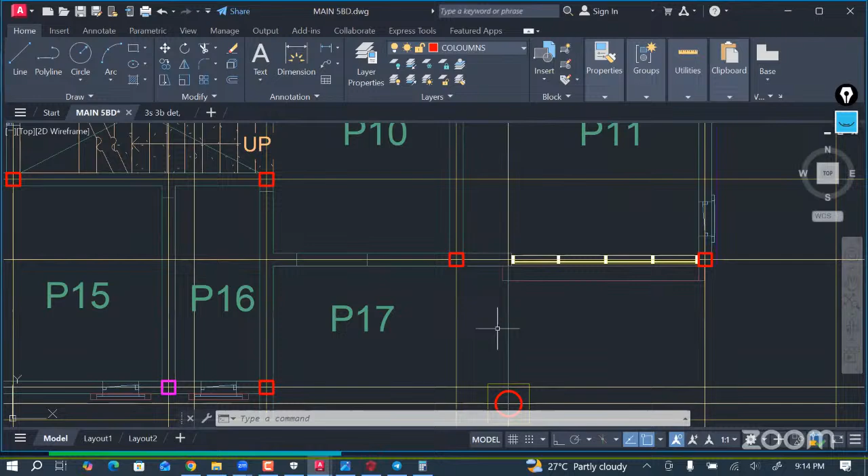So for that now we need to add a beam to this place. Let us simply offset this by 225. Select this, then O, enter, and then go 225, enter.

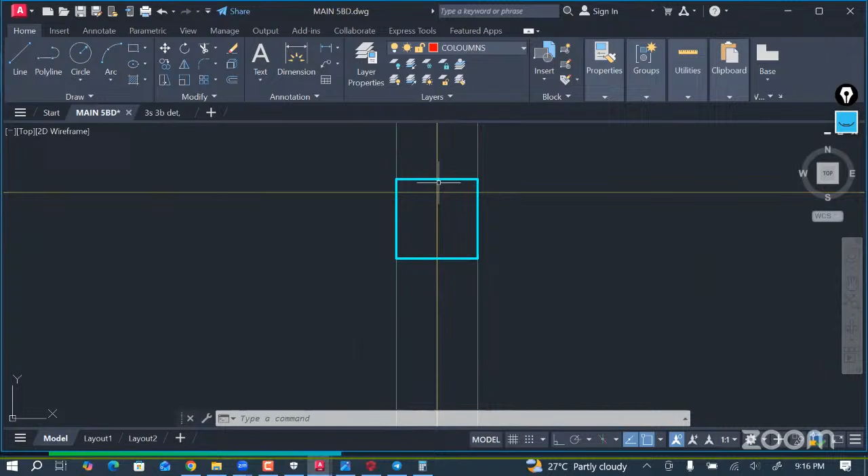So maybe you can leave it at this axis intersection, and it's going to have some eccentricity distance of 188 millimeters. Since this is going downwards in the y direction, that will be the eccentricity distance for this column, so it can be able to fit on this beam as well.

Moving on from here, the next thing we need to do is to know how we can transition this general arrangement drawing from AutoCAD to ProtaStructure, because all that we have been doing here is based on how we can use them for designs in ProtaStructure. Okay, so we have an error here.

Okay, let us correct that error. This grid here is supposed to be at the center points of this beam going to this place. So for that, I'm just going to move this beam by half of the width of the wall, or half of the width of the beam, which is 112.5, since we have a beam width of 225 millimeters. So it's going to look something like this.

Let's select this. Okay, so it can be looking very fine. So this is what we have for now.

Stay tuned. At the end of this lesson, we're also going to show you how you can print your design after you have finished your detailings. You have finished your analysis and design in ProtaStructure, and you have now completed your detailings. A question was raised: how can we do printing? How can we print our detailed drawings after we have finished that? So at the end of this, I'm also going to show you how you can do that.

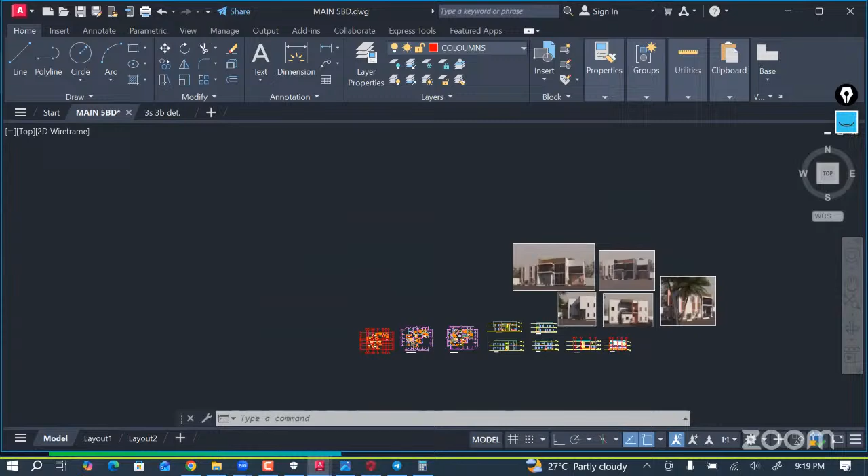So if you can see now, this is arranged in a kind of a frame, with horizontal and vertical members. We transitioned it from something that looked like this, with all these open spaces, hatches and others, to now look like this. So from this now, we can start exporting this to your drawings.

I always advise you to take a lot of time to do your general arrangement drawing. Because we are restricted by time in this training, that is why I'm going fast. But I always advise you, even if you use up to 2 hours to perform your general arrangement drawing, just take out your time and do that, because that is where your design actually begins. If you are going to have a lot of problems doing your modeling, analysis and design, it all begins from your GA, from a very poor general arrangement drawing.

So when you start doing a very poor general arrangement drawing, maybe because you are in a hurry, or you want to submit or meet a deadline, and you do a rubbish GA drawing, you're going to end up having huge problems in your modeling and designs. You'll find yourself modeling and remodeling, going back to add columns, going back to do all this. So just take out your time, make sure that distances between columns are what they should be.

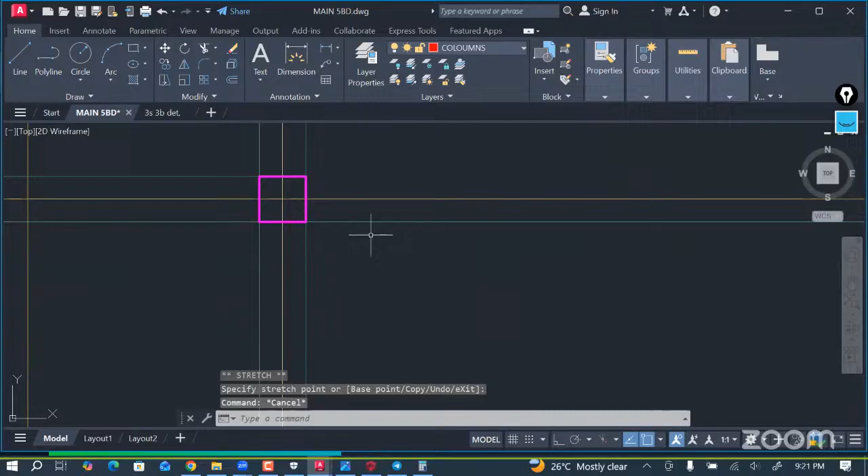So I want to delete this curtain wall. That's actually a curtain wall. Let's delete this and add a proper wall to that. Let's go extend, enter. Let's extend this. Okay, it's not extending, so let's just drag it. Let's offset it, or rather I just select this one. Let's just drag this one as well. Okay, so this is very good, this is very good for now.

So this now is what we are going to be exporting to ProtaStructure. And from here now, there is something we need to make sure we do, because ProtaStructure only recognizes a DXF file. So we are not going to be exporting the whole of this working space to ProtaStructure; we only need to export this one to ProtaStructure. So we are going to do something, and I'm going to show you what you need to do now in order to be able to export only this as a DXF file.

Already this drawing has been done in the DWG workspace. If I save it now, it's going to save as a DWG drawing. So let us save. Whenever you are performing designs, whether in AutoCAD or in ProtaStructure or anywhere, always form the habit of saving. We have not saved for a long time now, so always form the habit of saving, so that if your system runs down, or it times out, or goes through unexpected errors, and all that, ProtaStructure always does that.

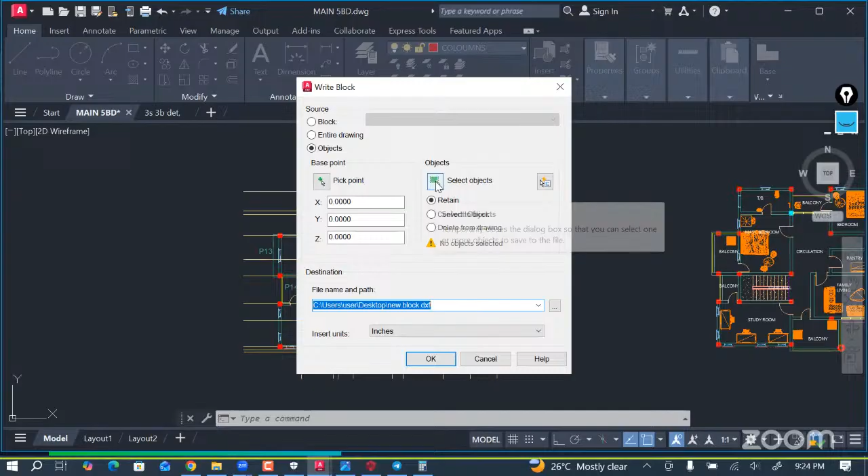Already it says, and we have not selected this. If you have not pre-selected this, just go here where it says select objects or pick points. I'll simply go with select objects. When you click on it, this window is going to come out, which is going to allow you to select the desired objects. Just select it and then click enter.

When you click that, you're going to notice this that says 389 objects were selected and all that. Go here and change your unit from inches to millimeters, and then make sure you choose a file path where you can save the file location for your DXF file.

I've already done this, I don't want to do this again. I just simply click cancel, then click cancel.

Now having done this, we can now simply from here go to our ProtaStructure to import this DXF file that we have already saved, and then let us see how ProtaStructure is going to read that and how it's going to respond.

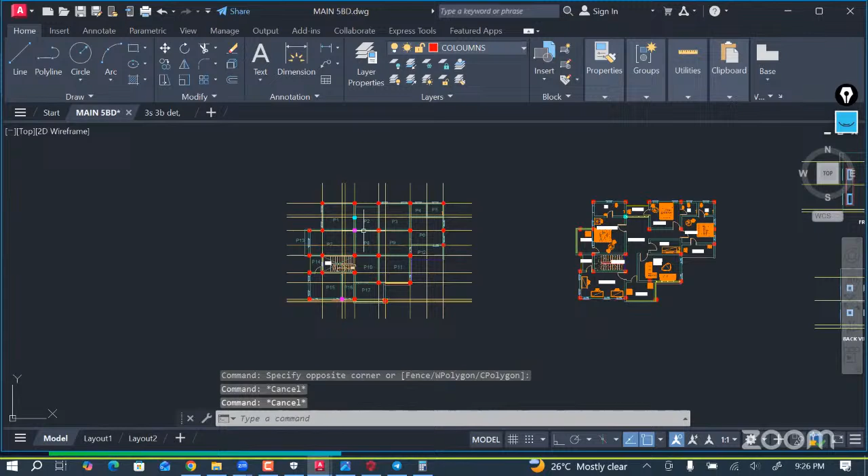You have to keep in mind that we created our columns here as polyline elements, and we created our grid as single line elements and not polylines. They are all attached to certain layers, even though these ones are of different colors, but they still belong to the columns layer properties. So now let us minimize and go to our ProtaStructure software.

So let's open up our ProtaStructure. I've already pre-opened this up before. So when we go to our external reference drawing and then let's click add. This has already been done multiple times during our various trainings on ProtaStructure.

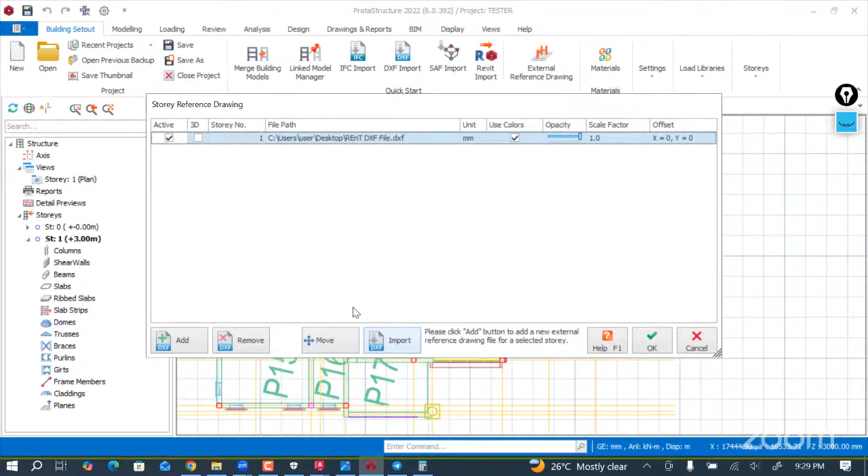Now let us go to our external reference drawing, open this up, and import members, so that you can see how that works as well. Although we have already done a lot of videos on this, I've done it multiple times. What I want to import is grids and columns. I didn't model walls, but it's pretty much the same procedure.

If you modeled shear walls, that is the core of a building, assuming you are designing a medium-rise or high-rise building, you might want to model a lift shaft, done as a shear wall. You can actually import that using polyline elements, just like so.

So the member we are importing is grids, and we are also importing columns. The layer that is going to be reading these grids from is the one that we selected when we were doing this in AutoCAD as grids. Automatically the software is very intelligent, it chose that one automatically.

And here for columns, it already chose columns, but this one says A-columns. I don't want to use that, so I just turn that off and leave only this one. For the text layer, we have not done any text, so I might want to turn that off too. So let's say okay, this is what we have imported.

Okay, so let's go to grids, and that is that. So simply click on import and then wait for about a minute and a half for it to finish importing.

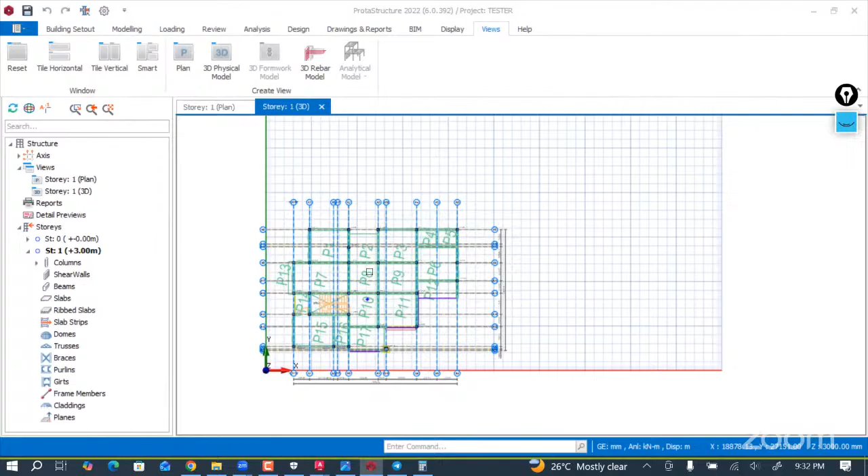So let's open up the 3D view so that you can see what we have successfully achieved. Okay, so this is the 3D view now. The columns that we just modeled in AutoCAD, we have created them here. Can you see that now? So it's looking actually very, very exquisite.

If you have been attending our classes or following up, this should not be a surprise for you. So you know what to do from here: how to model your cantilever slabs, all those slab edges that we have modeled here.

Okay, you actually know how you can go about that - how to add wall loads. We have done that, and how to add various kinds of loadings. So that is that now. This brings us to the end of our training on knowing how to perform general arrangement drawings in AutoCAD.

So let us open up our AutoCAD again. The next thing I want to show you is how you can perform your printing in AutoCAD. We have not done that before, but I want to do it now. There are various ways that you can print your work after you have finished doing your details, and one of those ways is what I'm going to be showing you now.

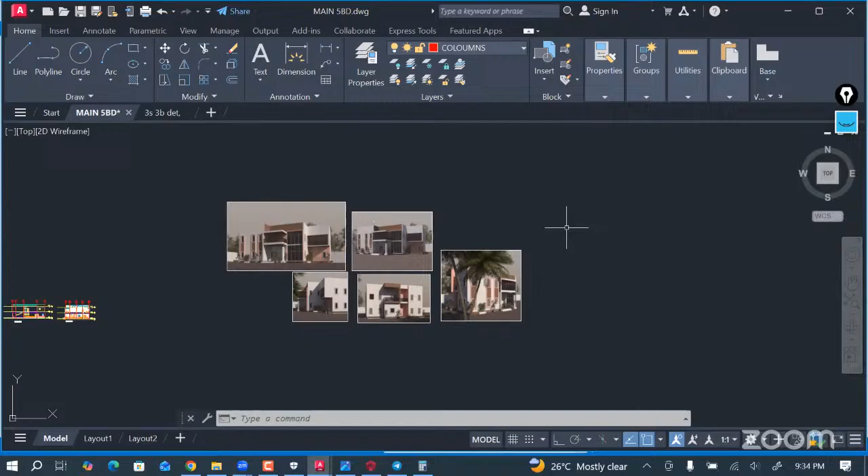So for that, now I am going to open a previous work that I have done before. This is a building, a raft foundation slab detail - a 3-story building sitting on a slab raft foundation. I have now successfully completed the general arrangement drawing of this, just like I've shown you, and also completed the modeling, analysis, and design on Protastructure, just like we have always been doing.

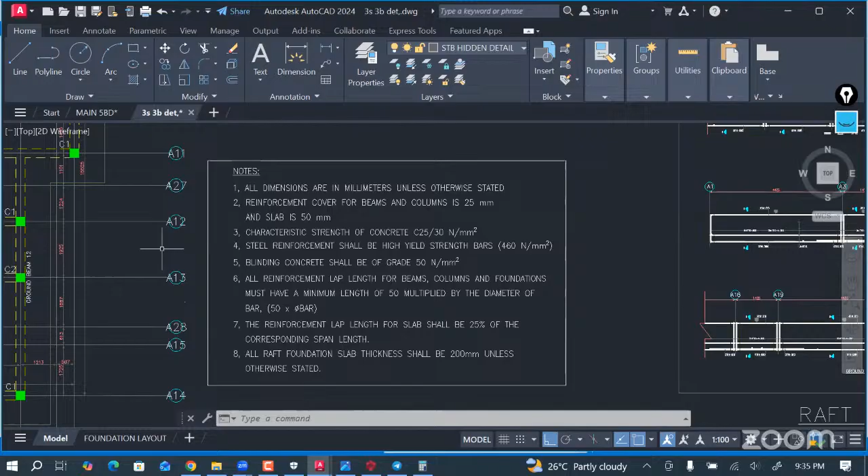This detailing was also performed in Protastructure. You can see this is the raft foundation layout, and these are the raft beams. You can see our column labels here, and notes showing what this is all about. It says all dimensions are in millimeters unless otherwise stated, and this states the characteristic strength of concrete used for these members, and the characteristic strength of steel - the tensile strength of steel and the compressive strength of concrete that we used for this analysis and design.

This was actually detailed here in Protastructure, although there is a template that you can use to make that look better. Just observe the way this drawing is - how neat it is. None of the labels are intersecting with any of the lines. You can see the dimensions, and you can see the columns.

Here we have ground beam one, and ground beam two, because both of them are very similar. This is ground beam three, and so on. And this is a different column - this is column five, this is column three, and over here we have column one. This was actually done in Protastructure.

Here is a section of this slab, section XX. So this is how it looks - this is a concrete beam. The toe of this beam, because when the beam has exceeded 1,000 millimeters, it's no longer seen as a beam at the ground level. It's designed as a wall, as a retaining wall. This beam here at the ground level is designed as a retaining wall.

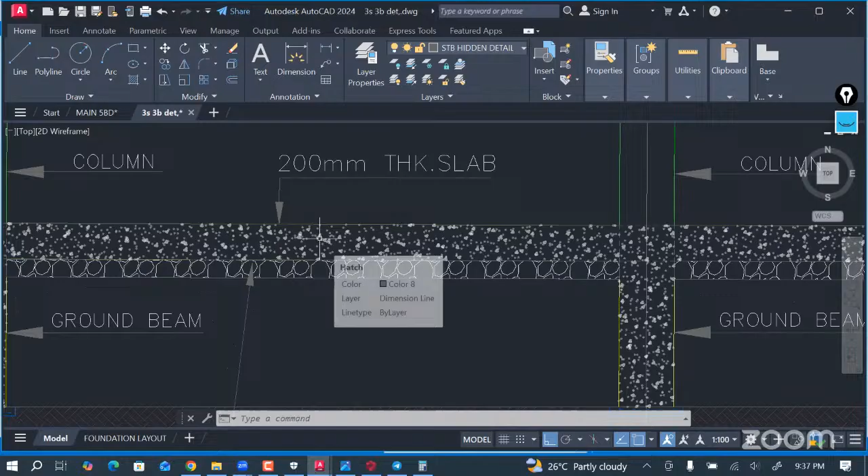So this is the toe of the retaining wall per se, but it was a beam. The toe is 850 millimeters of length. This is the ground beam, and this is the slab, thickness 200 millimeters. Sharp sand will be filled here, and this is hardcore stone filling before we can pour our concrete directly. So this is just a section showing what we have here, and here is the ground foundation beam details.

You can observe the details and see how neat these details are - the letters or labels are not interfering with any of the elements. This is the reinforcement, and this is the detailing of the reinforcement. It says 4T10 at 300, that is for the length, and here it says 3T16 top - TT is top, that is the top reinforcement of this beam. The depth of this beam is 1,000 millimeters, and the width is 300 millimeters. So this is the detailing of this beam, the detailing of this raft beams.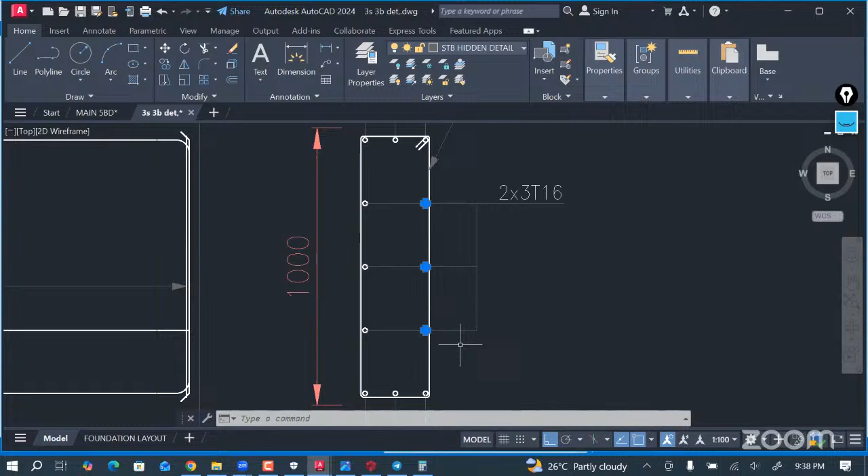Okay, we have also treated this in Protastructure as well in our trainings. Web beams: 2 times 3 T16, that is 2, 1, 2, 3, 3 T16 here, then times by 2. That is because it is 2 here. Okay, that is the explanation of that detail.

Okay, so we have all this here as well. You have all the beams details. So this is the raft foundation slab details, and this is the detailing of the slab. It's looking very, very neat. None of the elements here are intersecting with each other.

One thing that is very, very important when producing a detailed drawing, is that the detailed drawing is the only thing that the builders at the site are going to understand. They don't know all those bending moments and all that. So the only thing that communicates to them is the detailing. For that, your detailing must be very exquisite, very clear, and very concise. You must not have detailed drawings that are not easy to read. It's going to cause inaccuracies on site, lead to errors, and the worst case scenario is it can even lead to collapse of a building, just due to poor detailing because they cannot be read.

Okay, so this is actually a top. Here is a lap length of this bar, 600 millimeters, that is the minimum lap. So here is the top length, the top rebar of this. We can follow this call out now to see where we called it out. It's called out here all the way down here, and all the way down, showing you that it's called out all the way down here.

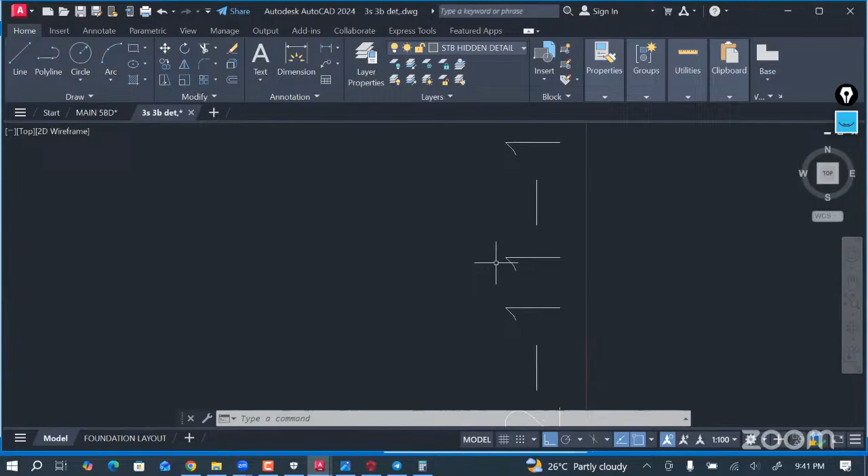So it says 17 T12 11 at 175 BB. This 17 is simply the number of rebars, and T12 is simply the size of the reinforcement. 12 means millimeters, the diameter of the reinforcement, and T here simply means the bar designation for higher strength according to the British standards. 11 here is just the bar mark number, and 175 here is the distance, center to center distance, of the reinforcement, and the B here simply tells you the layer which the reinforcement is going to be placed at, which means bottom, and T here is top.

Okay, so this is the foundation details, and this is the notes, and this now is a section showing the reinforcement arrangement. You can see this reinforcement went all the way from here for the slab, and for this beam now, you can see the way these reinforcements are arranged. So this is very, very good.

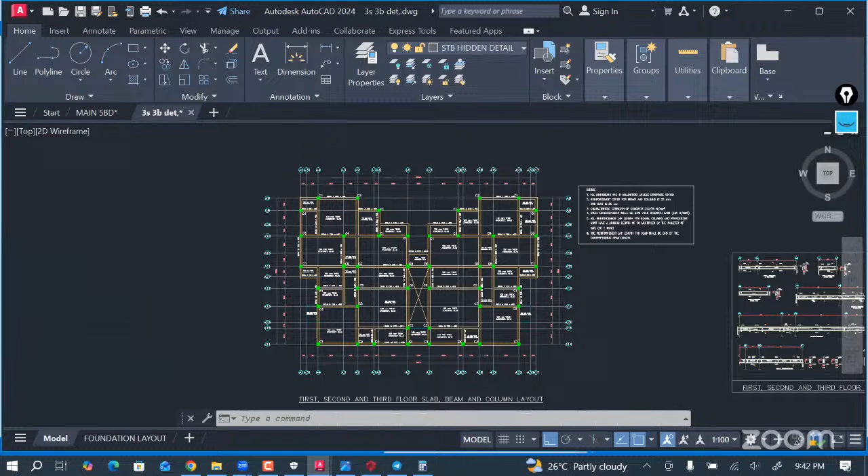This one as well, so this is the first, second, and third floor slab, beam, and column layout or arrangement. This is because the first, second, and third floor are typical, they are similar, that is why we have this label just like so. So this is the arrangement: this is where the column is, these are the beams, and these are the grid lines. The grid lines here are labeled, and the distances between the grid lines are shown, because this is a detailed drawing.

And this is the first, second, and third floor beam details. So these are the beam details, and this is the slab details for that as well. This is a void, which is a staircase region and all that, and it continues to the roof beams, and then the column details. The column details are not here, they were removed.

So now let us go to the reason why we came here. We came here so that I'll be able to show you how you can print. There are actually many ways to print in your design. One of those ways is using this printing layout option here, you can just simply take it here and put it here, but this is going to take us a lot of time to explain. So I'm going to use the most simple way of printing your work in AutoCAD to explain that.

So for that, now I will just simply go to print, this option that says here print or plot, rather. Just simply click on it once, and then let's just continue with single plot. So you can do all your basic settings here.

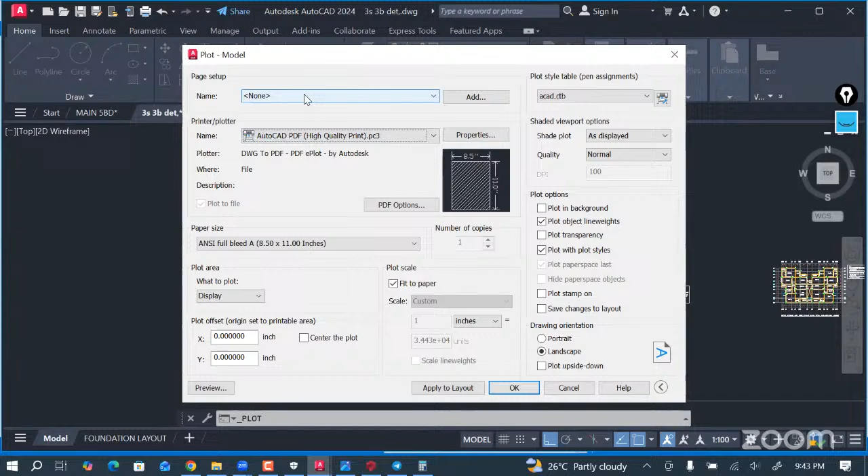AutoCAD PDF. You can choose your quality that you want, and then you can choose your paper size. It's usually A3, ISO A3, so I prefer 420 by 297. So it will be in landscape mode. Go here and then select Window. When you select Window, this dialog is going to appear that is going to allow you to...

copy or draw a screen over the region you want to print. So if I want to print this foundation beam details, I can simply click from here, from this endpoint, and go all the way down to this place, and then just simply click it. So when you have clicked that, you're going to get something that looks like this.

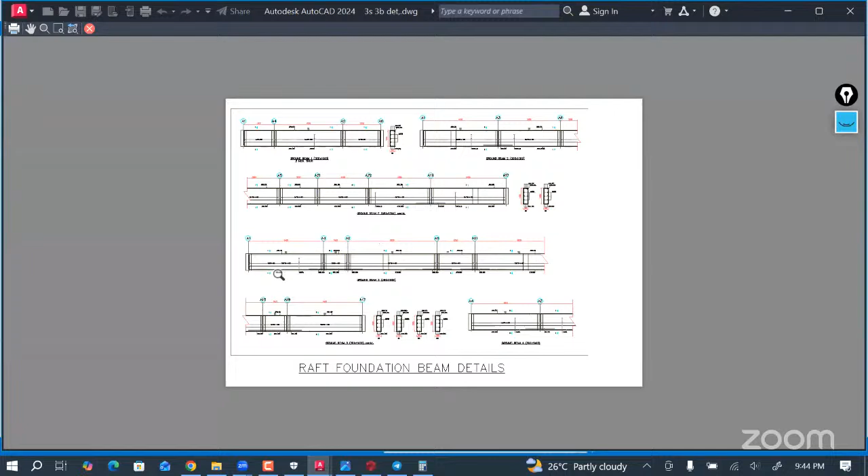You're going to get back to the dialog. So click on preview and let us see what you have selected, what it's going to look like on sheet. So this is what it's going to look like on sheet. It's actually in black and white, so just click that to take that off.

And then we are back here. Then here you get the option to change the quality. It was in acad.ctb. You can change it to monochrome, DWF styles, and all that. If you want it to be colored, you can change it there. And the quality, you can check the quality you want.

I just leave it as normal. You can choose a higher quality if you want. All these settings, you simply just need to look at it. They are very well, they are actually self-explanatory. So for anyone, you click on plot in background and all that, just simply come to preview and then click there to see what it will look like. So once you have finished doing that, just click on OK.

This screen is going to prompt you to specify a file, a location to save this file. Just go desktop for now, and then let's call it A, just call it A, then save it. So it is now being generated as a PDF. It's now being printed as a PDF.

So that is just the simple way of printing your work. You can now start dropping your questions, just type on the chat box now so that I can start reading and reviewing your questions. We are already behind schedule, you're already behind schedule.

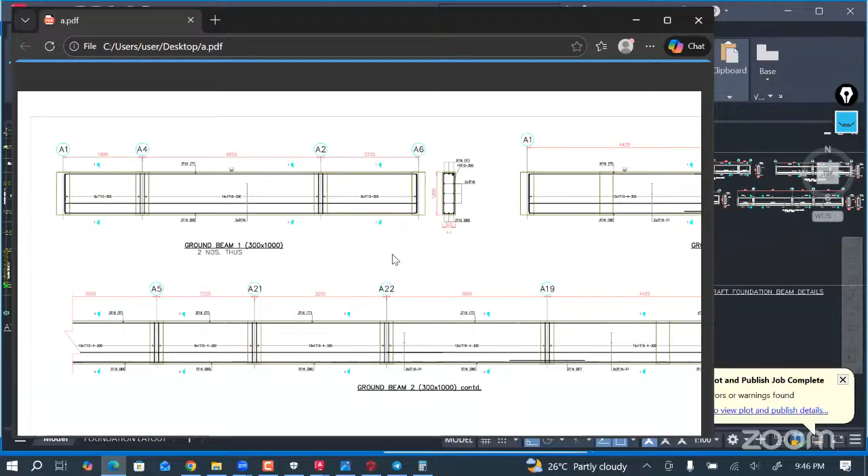So this is what we have now, for that one that we just printed. Let's just go down and then go here, plot again. If you want to print another screen, just go here, plot, continue, and then come to this side now, and then go to previous plots so that you can be able to know what you have printed previously.

Then come here so that all the settings are going to apply. Come here where it says preview. What you are going to be seeing is the previous one that we just printed, because that is the window that was selected. So go here to window, just click on this window.

This will give you the chance to select a new window. So you can see this now. This is showing you that this is what was previously selected. So you can now move to select this one, or okay, let us select another screen, let's simply select this.

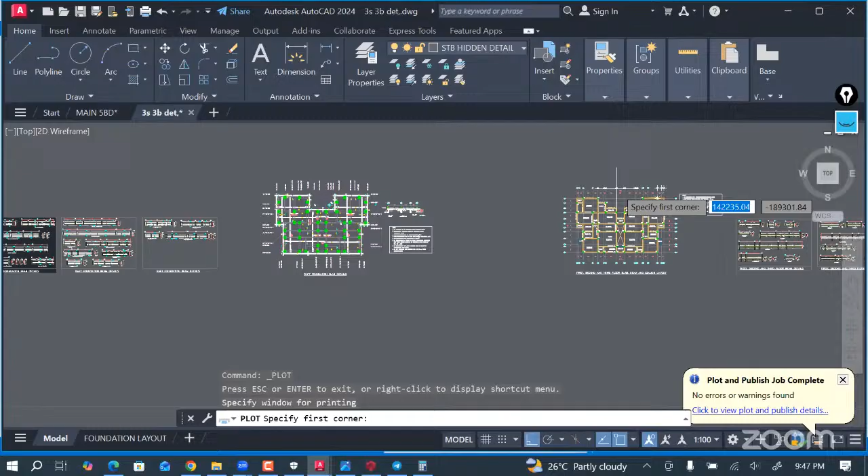So you are going to repeat the same process all the way down for all the files or all the drawings, and select label this one as B for all the drawings that you have all printed. Usually you are meant to create a sheet that's going to show the details of your drawing, like designed by who, the client that owns it, the approval, and the person who checked and approved it, and all that. You are going to create a sheet and then place all your drawings inside that sheet, that's how it's meant to be.

Can you hear me, sir? Yeah, I can hear you.

Okay, okay. You have done justice to that. Okay, so, okay, so

Okay, so after that, you need to go to your file location and download this software called PDF Merger. You are going to use PDF Merger to merge your drawings, to merge these PDFs that you have now created, because they will be in single PDF files. So you can just merge them so all of them are in one single PDF file.

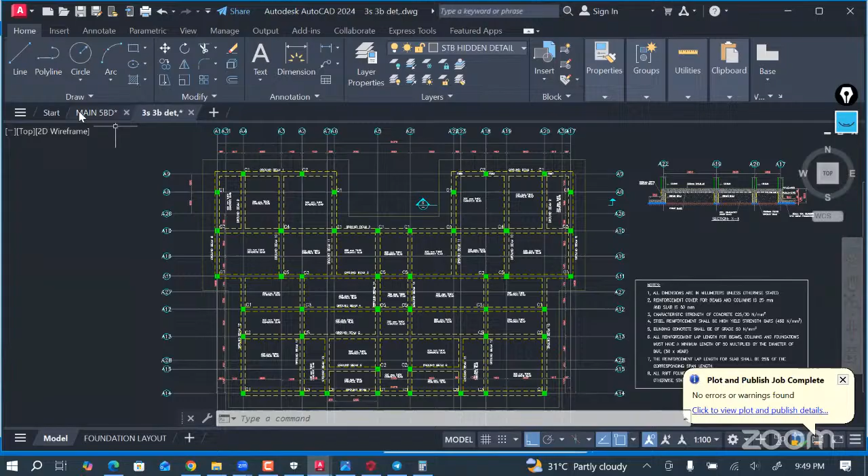So you can produce better drawings that can be used for real life projects that are creative, using Revit. Revit is actually a very important tool that any architectural designer wants to focus on. So I want to see questions. I'll be looking at the comments section to find questions.

Okay, so can you hear? Yes, I can hear you. Okay, while we wait for the question, we are going to devote like 3 minutes to that. But so far, what you have explained is self-explanatory. It's something that anyone who started following your session from the beginning up to this point is going to catch up.

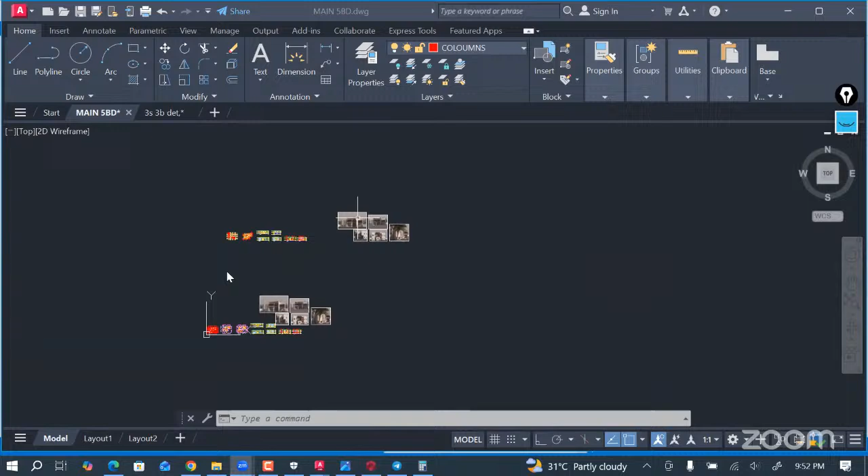The column is positioned inside the living room. Will that not affect the architectural plan, sir? Definitely yes. So the column I positioned, yeah, I think around this region, is definitely affecting the architectural plan. But it's for safety reasons.

During design, there are certain factors you need to consider first. The first factor of consideration is safety, then secondly is serviceability, then economy, and then aesthetics. Aesthetics is where the architectural things belong. Some choose to prioritize aesthetics over economy and all that, but nevertheless, safety can always be the number one criteria to consider.

So mind you, the length of this beam, if we are to remove this column now, the length of this beam is going to go all the way up to 7.338 meters. A beam of 7.338 meters is possible to be built, it's not an impossibility. But then this beam, from my experience, a beam this length, a long span beam, usually fails by deflection and not basically bending, even if the beam is strong and the depth is big. It usually fails by deflection.

So one of the ways of correcting a long span beam's deflection failure is by increasing the depth. When you increase the depth, you are going to notice the depth is going to be dropping up to 600 millimeters or 700 millimeters in order for the beam to be able to stand. Now looking at this drawing, we have a height above ground of 3375 millimeters. When you drop a beam up to 600 millimeters, it is going to still affect the architectural view of the whole open space that was here.

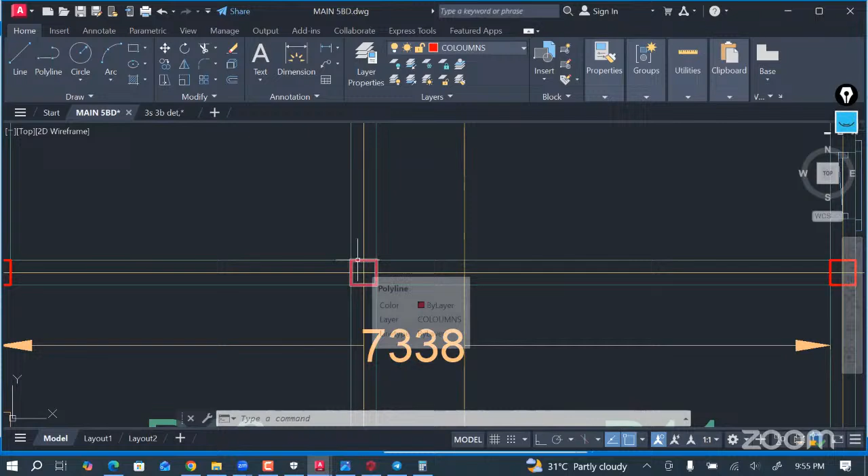If you don't add a column here and you span a beam all the way from here to here, it's going to add a lot of weight on this column, causing it to require a bigger section size. The way you do your general arrangement and design depends solely on you as the structural designer. You can choose to remove this column, add it, or leave it like this, but this way is the most suitable for me to have it here.

Let me show you something about this column. Let's copy this down, and let me go all the way.

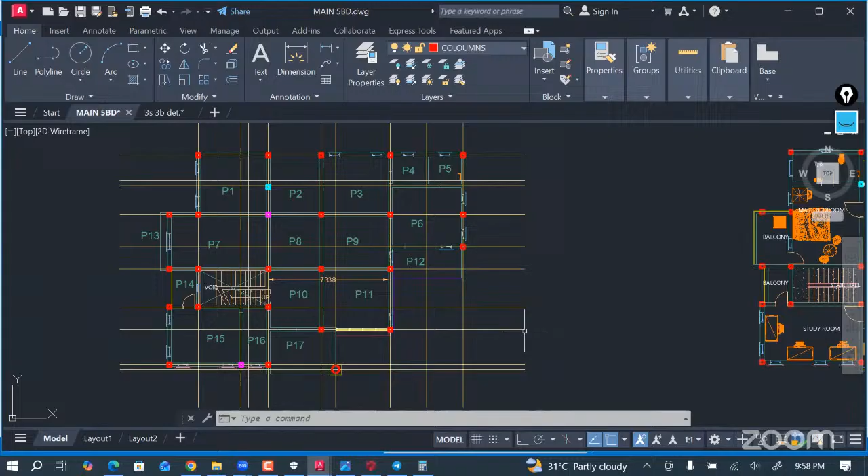When the panel exceeds 3,000 meters squared, 30 meters squared, the beam you add at the center, the beam you run at the center, is it a drop beam or a hidden beam? It's going to be a drop beam. It's not going to be the same depth as the slab, because what you mean by hidden beam is a slab beam, that beam you run inside the slab. So it has to drop, and it's not going to be the same thickness as the slab thickness. I believe that has done justice to the question.